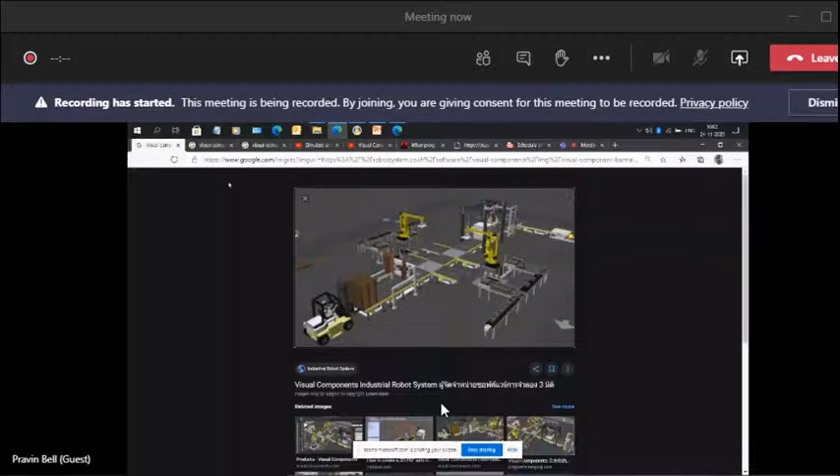Thank you, sir. Oh, can we start? Just a minute, sir.

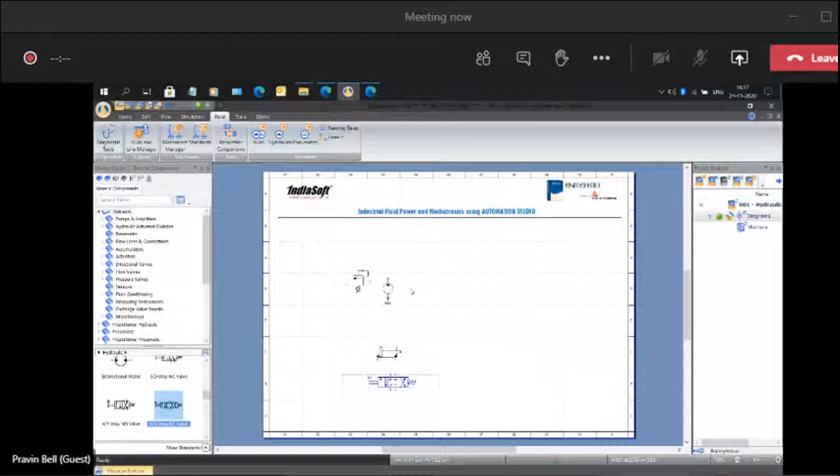So I'll be building only one basic piston extension circuit. Okay, and I'll lay out these components. I join these components. So in a matter of seconds, I build a simple piston extension circuit. Now, before we simulate the circuit, if you go to the piston and you check the piston properties, we have things like, is there an external mass on the piston rod? Is it at an inclination? What are the stroke lengths, diameters, etc.?

These are there. We also have things like, you can customize this entire cylinder. Do you want to put damping springs? What are the spring stiffness ratios? Is there a brake on the cylinder? Do you have a carriage? What type of position sensor you want to put, force sensors, speed sensors. You can customize this entire cylinder from scratch.

Even in the valves, we have total control over the internal flow curves of these valves. Now, this specifically comes into use when people are trying to do research. For example, Jadavpur University, they were using certain valves from Eaton, in which they wanted to go and modify these internal flow curves of all these valves here to make it match to the industry component. So they were able to do that because of Automation Studio.

Also, if you want to change a particular spool, there are different types of spools available in Automation Studio, hundreds of spool types. Also, things like if I want to build a 4x3 valve, I get only 4x3 spools available here. So this is totally customizable, full power over the internals of the software.

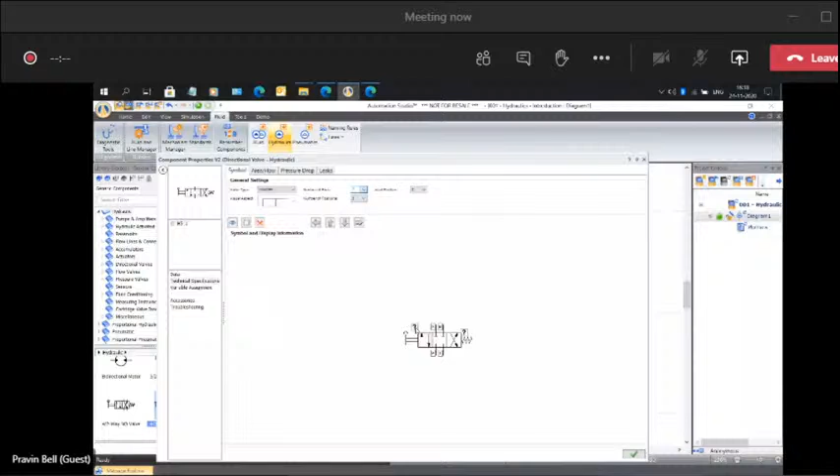Now I will simulate this particular circuit and I operate my lever. You can see simulation happening. While simulation is going on, I can change the pump displacement, cracking pressure of my pressure relief valve. You can see it is moving fast now.

Okay. Now, this is okay. The circuit is behaving, it is moving. But what is more relevant is that I need to take measurements, etc. And for that particular purpose, I have different types of measuring instruments. I have these dynamic measuring instruments where I can point at a particular component. It automatically detects what I can measure for that particular component.

This is automatically detected. I say, okay. If I say I want to measure across 2 points, it automatically says differential pressure. I simulate the circuit and I get my readings on my measuring instruments. Okay. Now these are happening very fast, so I need to take plots, which I can analyze later.

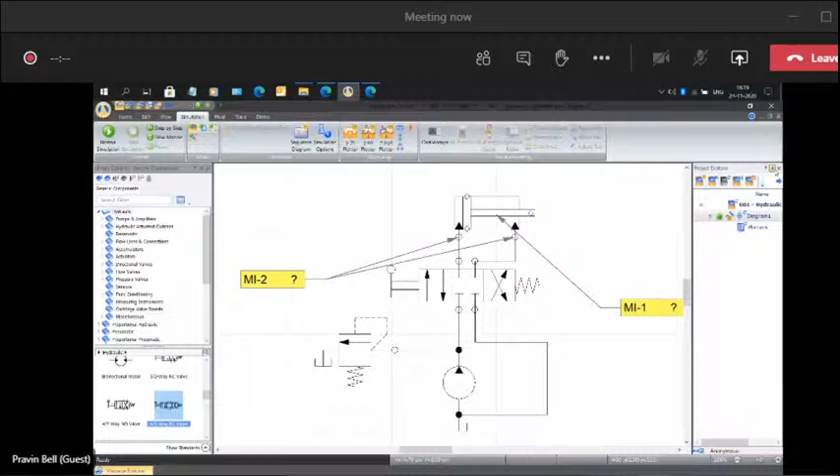Okay. And for that reason, Automation Studio now has different types of plotters. So at any given moment of time, I can open up to 4 plotters. So 2 plotters as a function of time plotters, a third plotter y as a function of x plotter, and a fourth plotter, which is a 3D plotter, y as a function of zx plotter. So the first 2 plotters are for time-based plotting.

For example, I can drag a component, put it on screen. It is going to show me the plots against the x-axis as time. So I simulate this particular circuit and I can get my piston extension here. I can plot these values here. These plotters are fully customizable. I can take measurements on them in this particular fashion, okay? Because I need to accurately see my piston extension times, etc.

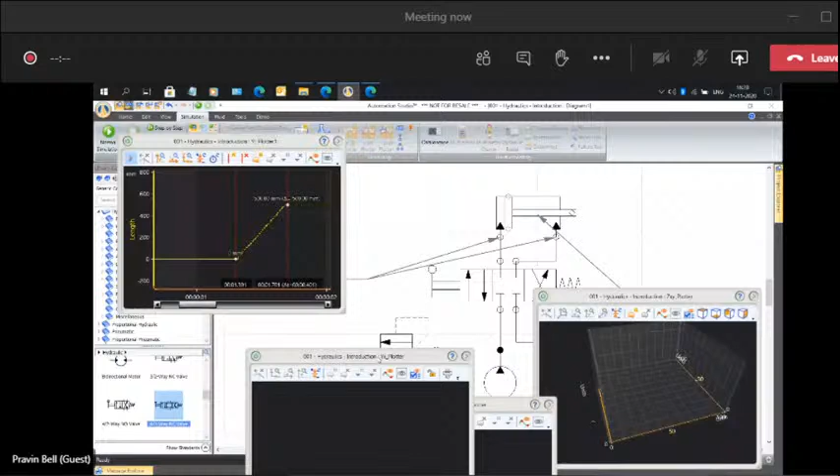So at one time, I have 2 y as a function of t plotters. If I want to plot 2 variables against each other, let's say pressure versus flow or something, I can use this plotter. And 3 variables against each other, I can use a 3D plotter. So I have very powerful plotting options available here. I can export these plots. I can say copy plot image and directly put it in Microsoft Word, PowerPoint for my dissertation or for my project report. That is possible.

Okay, so this is a basic hydraulic circuit. Also, during simulation, I have cross-section animations for these components. Okay, these are there. These are useful in teaching, no doubt. So I have these cross-section animations. Yeah. So this is a basic hydraulic circuit. Now going forward, there are more than 5,000 components in Automation Studio. So it's a very, very huge library.

Now, let's say a small example of an air distribution system. Now, this is not there in Anthony Esposito, but this is found in Majumdar Pneumatics. And air distribution systems, usually a lot of teachers over the years have called me up, how do I do an air distribution system experiment for my students? And there are solutions in Automation Studio.

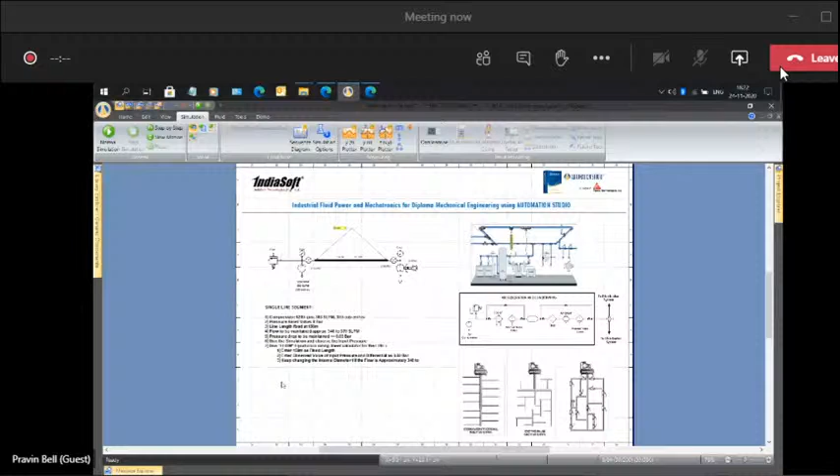Now, for example, if you go to the Majumdar textbook or even on Google, there are certain definitions for air distribution system, certain limits have been given. For example, the main line pressure drop should be maintained less than 0.03 bar. Okay. And let's say the pressure drop between the first point and the end point where the actual pneumatic instrument is working should not cross 0.1 bar.

So basically what we do is we first take the main line, 150 meters and 15 mm diameter. And if we simulate this, you can see that the pressure drop is 0.258 bar, which is very high and it is not a feasible pneumatic system. So let's say I change this to 25. I say okay. And now if I simulate my circuit, you can see it's 0.055 bar. So this is an acceptable pressure drop for a main line of a pneumatic distribution system.

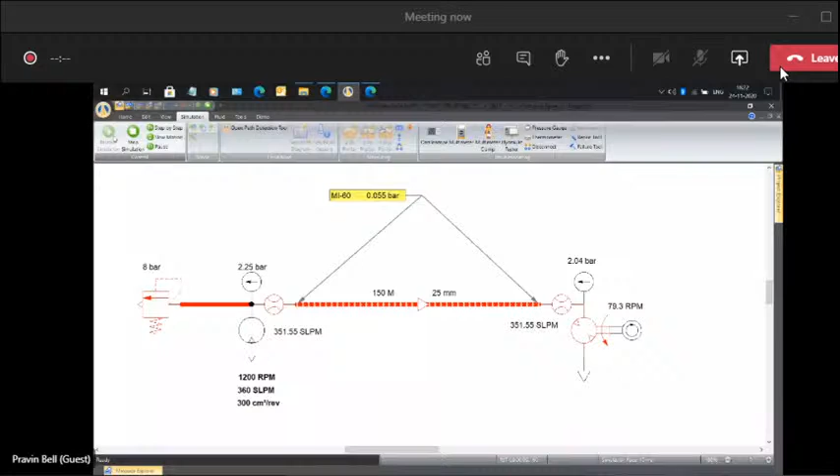Now this is a very small part, but the main problem comes when you're trying to design the rest of the pneumatic system. Because in the industry, there are different types of air distribution systems. Okay, these are the different types. There's the inline conventional network, there's an octopus type, and there's a closed loop type. So the closed loop type is supposed to be the most efficient because extra air anywhere in the loop gets diverted to the point where the maximum air requirement is.

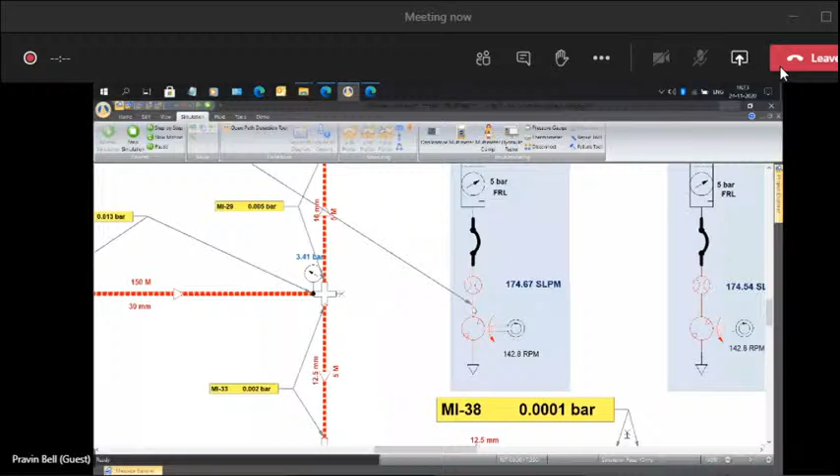So if you take a larger system like this and we simulate this, okay, you can do this in much detail. For example, if you see this, 0.097 bar is the pressure drop between the starting point here and the end pneumatic instrument here. So that is what our specification defined. Also, at this particular point, you can see air is coming from both directions. That is because the air requirement here is higher.

And because it is in a closed loop fashion, you can see the extra flow coming here. So in this way, you can play around with the diameters, the lengths, the pressure drops across maybe the tee sections of the fittings, etc. And you can go ahead and develop an entire air distribution system. So simulation software like this can be used.

Now, this itself becomes sort of a research project, or you could take up a practical student project of maybe an air distribution system which is there in a car service center of maybe Volkswagen or anything else. You can pick up projects like that and you can design these in-house.

Now coming to a very powerful part of the software, something by the name of sizing module. And sizing module is where the main designing happens. See what happens is in education I've seen that the word design is very conveniently used, because if you connect 2-3 components together and it is operating in a particular fashion, it is considered a design. But design actually means that it has to be designed to do a particular amount of work under particular conditions.

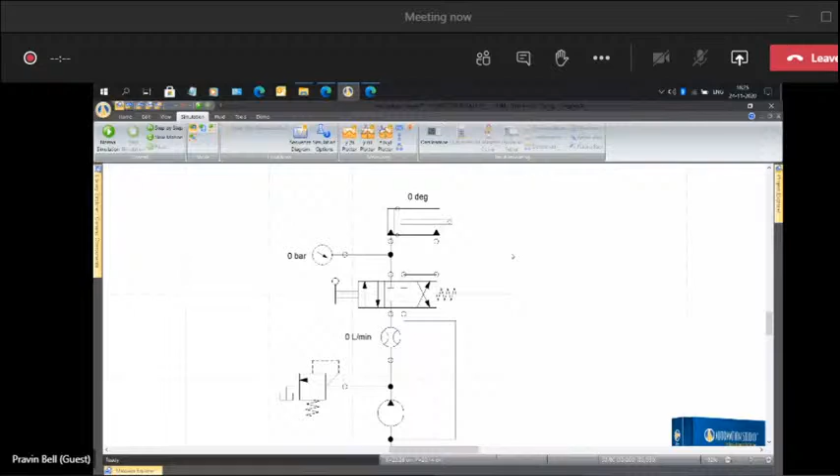So let's say we take a simple example here that this piston should extract from 0 to 100% in exactly 2.5 seconds. So how do I achieve a condition like that? Okay, so I first go to my pump, and I note down the rated flow. Rated flow here says 120 liters per minute, because this is the flow which is coming from the source, the pump, and this is going to operate my piston. So I note down this value, 120 liters per minute.

Then I go to my cylinder and open the sizing sheet module here. This is what the sizing sheet module looks like. On the left hand side, you can see there's an entire list of components here. And each of these components has got a list of equations. There are hundreds of such equations. Now, what these equations mean is that if you see at the bottom here, there's an input side and there's an output side.

So on the input side, you enter the values which are known to you. These are the known variables, and the software will automatically calculate the unknown variables. And the equations used for solving these sheets are listed here for reference, and the calculations are done here. So now I need a particular equation in which, what do I know? I know that I want a piston extraction time of 2.5 seconds. I enter that value. Piston diameter is known as 50, and piston side flow, I say 120 liters per minute.

The moment I enter these values, the software automatically calculates the stroke of my piston here. This has been automatically calculated. I say pass this value to my cylinder. I say okay. I close this sheet. I open a plotter. And now I'll simulate my circuit. I'll stop the simulation. And if I measure the piston extraction time here, you can see this is 2.5 seconds.

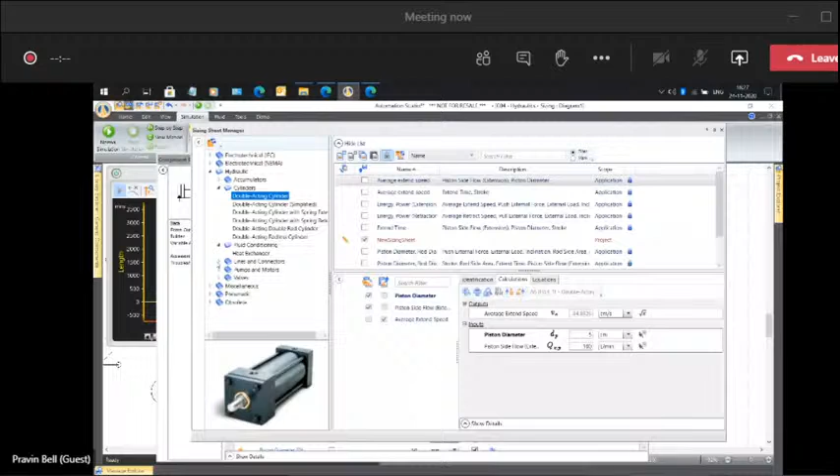So in this way, I can do a lot of these calculations here. I have to choose the equation in which I know the known variables. The software is going to use the empirical equations in the background and do the output calculations. So there are a lot of these components available here which can directly help me to do design based problems. This module is very heavily used in industry for these types of calculations. So that was the sizing module. It can be used in a lot of research also.

Another very powerful module is how do we attach forces, opposing forces and loading conditions in Automation Studio? Because at undergraduate and diploma levels, we are just looking at circuits which are operating, but we are not actually calculating what is happening when loads are applied, how it behaves, etc. So for such a case, we will take one small example: a simple circuit mounted on the front of a bulldozer, and this bulldozer is pushing sand. As the bulldozer moves, the opposing force of the sand increases over time. The sand piles up, and as the piston extracts, this is going to increase the opposing force.

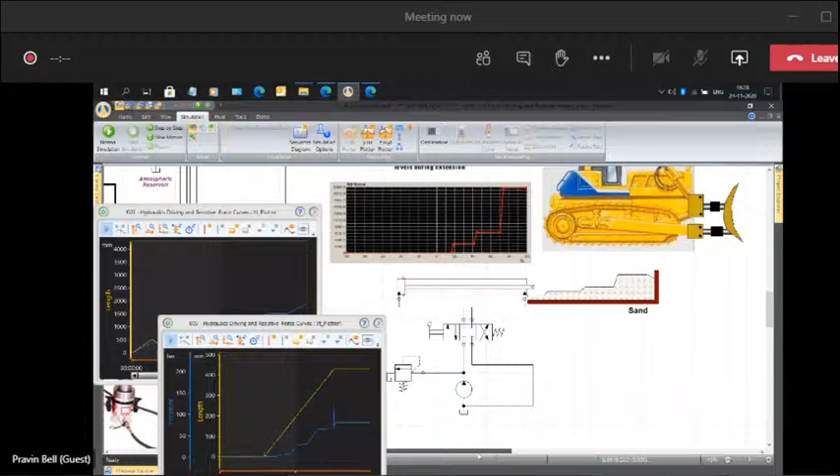So now how do I tell the software that such a condition is being applied? I go to this double acting cylinder, I go to force curves, I go to resistive force curve, and here you can see 0 to 100% on the x-axis.

So on the x-axis, this is the piston extraction, 0 to 100%, and this curve is the opposing force here. Right now it is pound force. You can choose your units, daN, Newton, etc. And this is the opposing force which is going to act on my particular cylinder.

Okay. And as an engineer, I want to go and plot the linear position of my piston and the piston side pressure which is built up inside my cylinder here. Okay. So now I'll simulate this particular circuit. And I want to show you certain interesting

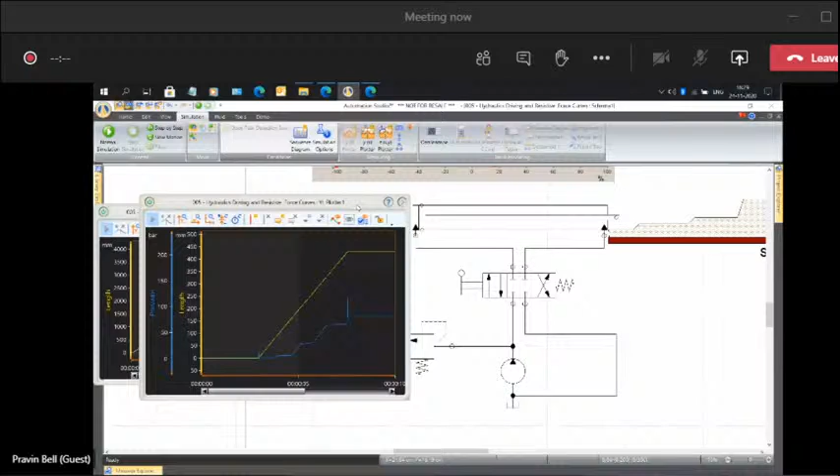observations. I've paused the circuit, and you can see that the piston has stopped at around 75 to 80%, because at that point the opposing force was so high that it could not push more than this. At the same time, you can see there's a spike in the system. You can see it in the graph here.

So now you as an engineer, how do you go around improving this circuit? You can go and change the diameter of the cylinder. You can change the system pressure of the pressure relief valve. You can put an accumulator in the circuit. There are various options you can try out. So in this case, let's say I'll go and change the cracking pressure of my pressure relief valve, and I continue the simulation, and you can see the piston now reaches the end position here.

So such type of work can be done in Automation Studio. You can do all these trials and build upon these circuits, because in the industry, this is how they actually use this particular circuit design software. So that was resistive force curve.

Now, obviously, we have an entire list of electrical components in Automation Studio: push buttons, solenoids, contactors, relays, coils, etc. And you can build electro-hydraulic, electro-pneumatic circuits. And I have seen that a lot of people, when they're doing student projects or maybe even research work, there are two types of work they do. One is at a very basic component level and a lot of mathematical calculations. And the other is the system design.

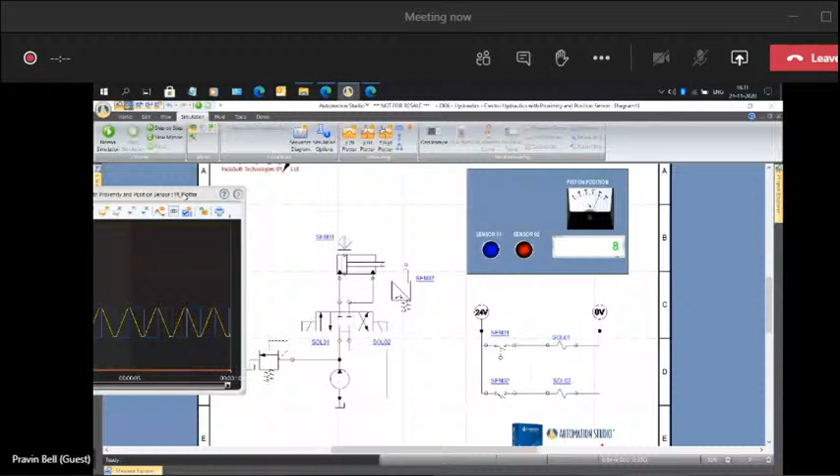So in this case, we've taken an HMI panel here. We've taken an electrical circuit here where there are two solenoids which are connected to this valve here. And there are two sensors on this cylinder here at 0 and 100%. If I simulate this particular circuit, we can see we get a self-reciprocating action here.

So since this software is a fluid power software, if I increase the displacement of my pump, it moves faster now. The circuit responds accordingly. So this is an electro-hydraulic circuit. Okay. Now going ahead, we are coming into the area of proportional hydraulics and pneumatics. So let me open up that particular area.

So now proportional hydraulics and pneumatics is where we use proportional devices. For example, steering wheels, joysticks, set point input devices, PID feedback controls, etc. And the applications for these are very huge. Almost in every field of hydraulics and pneumatics, we require proportional control. Okay, so even if you see the cabin of a Caterpillar machine, it has all these proportional devices there in the cabin itself. Okay, these are used.

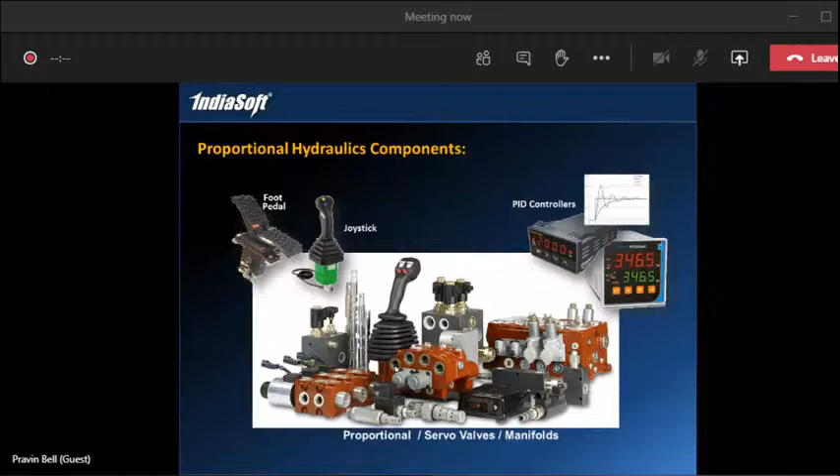So basically in the industry there are three types of valves. One is the basic valve, which is an on-off type of valve, very low cost, which we see on all trainer kits in all colleges. They're typically used. Then we have the proportional valves and the servo valves. Now these are very rarely seen in colleges. In my experience, in not more than 4 to 5 colleges have I seen proportional valve or servo valve trainer kits.

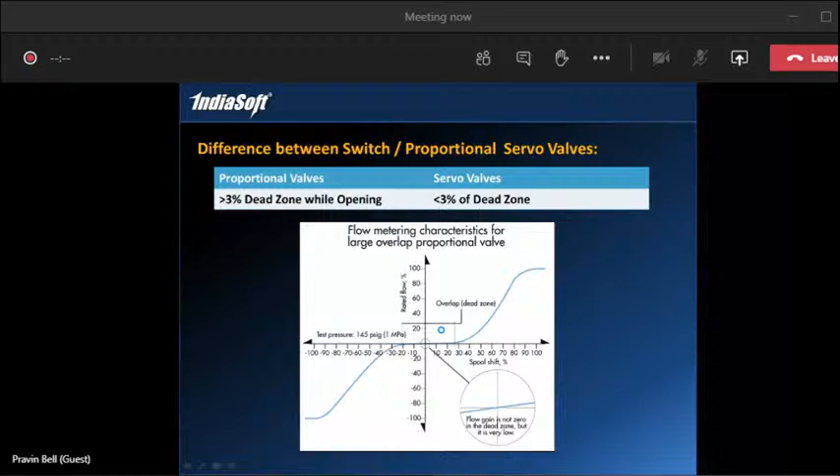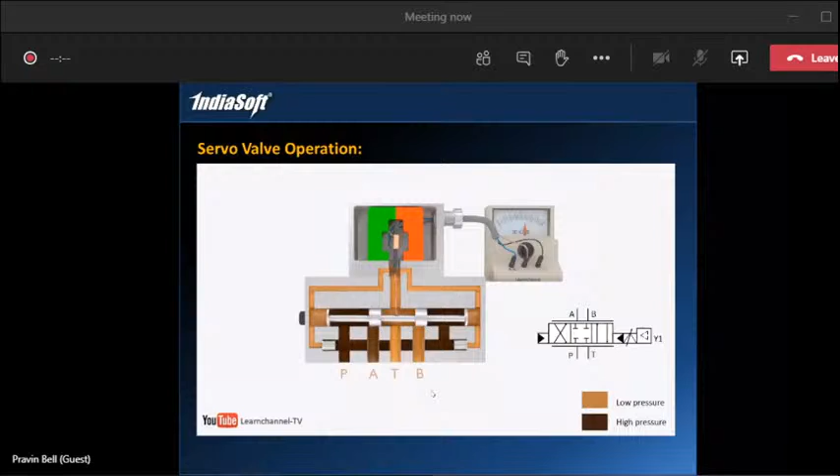And there are a lot of manufacturers of servo valves in India also, Eaton being one of them. Eaton has a very powerful valve by the name of Eaton AxisPro valve. I'll be showing you a circuit of that also. Okay. Now, having said that, this is what proportional hydraulics is supposed to be.

Yes, sir? Can I continue? Yes. Okay.

So now, having said that, we'll be shifting between a lot of applications because everything is interconnected. So now Automation Studio in the professional version has this entire list of catalogs available here. These are available in the professional version, educational also, but under annual maintenance contract. And if you see here, we have things like Parker, SMC, Eaton, Hydac, Casappa.

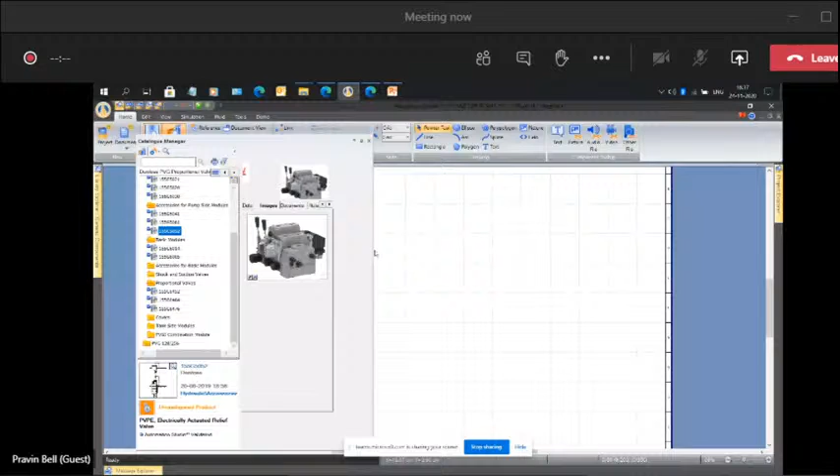There's an entire list: Danfoss, Poclain, all these are there. These are catalogs, more than 50,000 in fact. Industry catalogs are there in Automation Studio, and these can be downloaded, and if you want to see them in the software, I will show you. If you come to home, there's this catalog manager here. This menu is not usually available in the educational versions. And here there are these entire catalogs available. For example, Danfoss proportional valve group.

Now, PVG is a concept which is very widely used in almost all types of hydraulic equipment. In fact, I had a few students who did work in the Danfoss PVG valve category, and one of them even published a research paper for a hydraulic forklift machine. I'll be showing you that particular circuit. So what is a PVG concept? Okay.

So PVG is a brand name of Danfoss proportional valve group. There's an equivalent with Eaton also. Eaton calls it stack valves. Danfoss calls it proportional valve group. Now, if you see in this image, where all these levers are there, when you're building a circuit for a hydraulic tractor, or earth moving equipment, or an excavator machine, you cannot have 20 valves mounted on an iron bracket and pipes running all over the place. So we need something much more compact.

So if you see these levers here, 1, 2, 3, 4, 5, 6 levers, each of these levers is operating a particular valve which is within this casing. So this is a group of valves which has 6 valves cascaded into each other. So depending on your application, for example, this particular green machine requires three actuators to be operated, and that is why in this group of valves at the bottom, you require 3 valves.

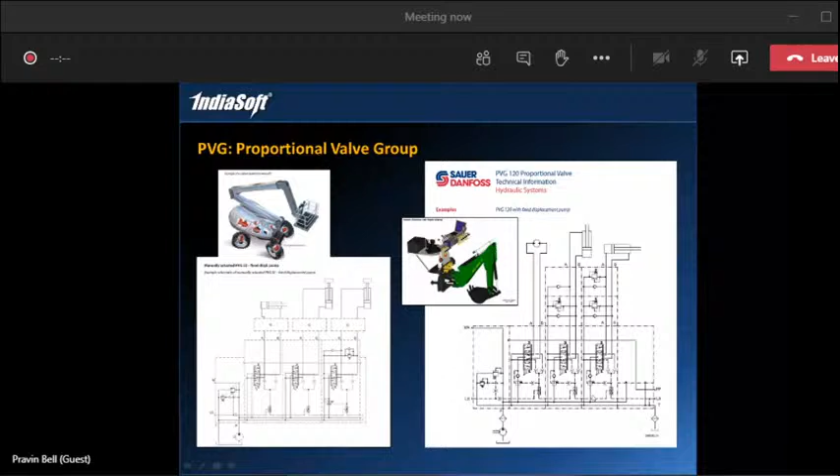Sorry to interrupt you, sir. Hello, sir. Your audio is breaking. Hello, sir. Hello, sir. You're not audible, sir. Hello, Pravin, sir. Can you hear me? Yes, sir. Can you hear me now? Yes, sir. Continue, please. Yes, sir, you are audible. I think someone muted me by mistake. I didn't do it.

Okay, I'll continue. So now in this PVG concept, there are different varieties of PVG by Danfoss. Let's say we come to the PVG 120 module here. If you see, there is this catalog part number 155G50. If I pull out a component, this is a pump side module. I pull this here, I put it here. Then there are different accessories for the pump side. These are the internal regulating devices. This plugs directly into this particular module here.

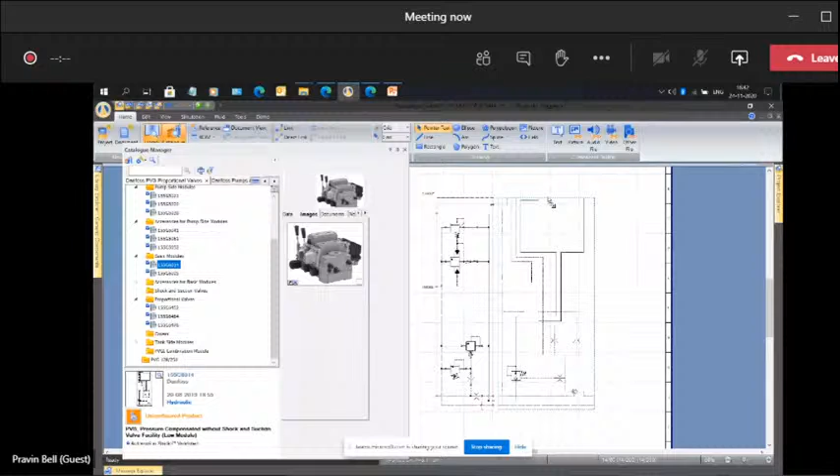Then there are these basic modules here. I pull out a manifold block, I get it here. It plugs directly into this pump side module here. There you go. Then depending on what type of operation I have, I can directly put out a proportional valve here. I'll just zoom into this. This proportional valve, I can directly plug into this system here. That is the beauty of industry catalogs, because these are ready-made components directly available from the manufacturer.

Not only that, but the internal flow curves. This is the behavior of the valve, how it behaves internally when it is operated, and the internal flow curves of the spool when the spools are opening up. Even these are fed into the software. Only at MTech and research level do people bother about these; at UG level people are really not interested. And since our FDP is about research interests of automation and robotics, this is how we go ahead by building an entire PVG block.

Okay. Now, before we simulate this, I want to take you through what is proportional control, and then we'll come back to PVG. Like I told you, we have to keep jumping between applications because they're all interrelated. So in proportional control, we have been teaching students PID, proportional integral derivative controls. And more than 80 to 90% of students do not understand the application of a PID controller and how it is to be used in industry.

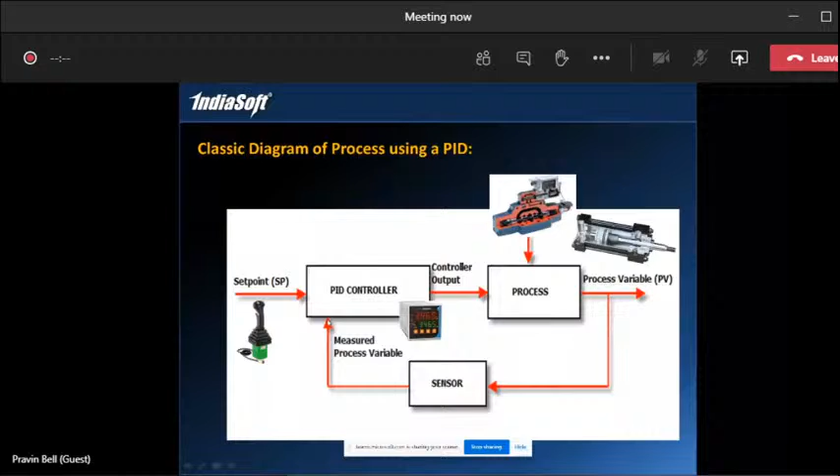Then we build this circuit, typically using MATLAB, Simulink, LabVIEW, or any multiphysics software. We build a mathematical block diagram and show them that if you change the PID values, these are the graph behaviors. And there are very strong research papers using mathematical block diagrams for hydraulic and pneumatic control, and how these PID circuits are used to control such applications.

In PID tuning, there are different methods. In the manual tuning method, you set the integral and derivative values to 0, and increase the proportional value until you get ultimate oscillations. Then you cut down the proportional value and so on, and you get a stable response. Similarly, we have the Ziegler-Nichols method, typically taught in MTech level courseware. This is what we typically do in MATLAB and Simulink: we build this block diagram on the right and conduct this experiment.

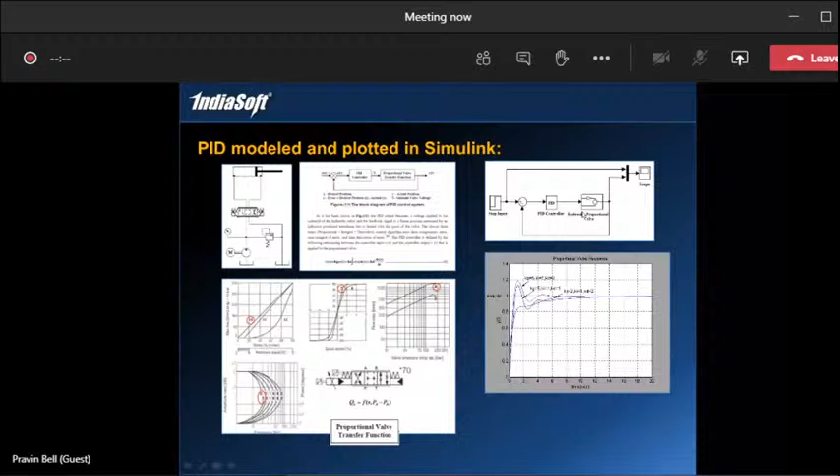So now, how do we achieve the same thing in Automation Studio? In Automation Studio, we have a PID controller. Wait, I'll open up another circuit, not this one.

Okay. Now, actually, this circuit has got 3 circuits. I'll explain. In fact, there's a research paper on PID control for hydraulic pneumatic circuits. So we'll take this first circuit on the top here.

Now, on this circuit on the top, we have a cylinder here. On this cylinder, if I go to the builder, there is a position sensor mounted on this particular cylinder. So the feedback coming from the cylinder, which is 10 to minus 10, is the left and right end position of this particular cylinder. Okay, so that is the signal coming from the position sensor.

If you see the proportional valve, we have to scale the solenoid signal also, -10 to 10. Because in the automation industry, let it be any type of a control system you're trying to build, signal scaling is very important. You cannot apply a 0 to 5 signal to an actuator which is set at -10 to 10. Behavior is going to be totally erratic. So you have to make sure all these settings are done here.

Okay, so the cylinder is sending a position signal to the control device. This is the PID controller. Then as a set point input device, we are giving a step wave like this. This is more of a combination of a triangular cum square wave, because I'm treating you as, let's say, MTech research level of simulation. There are certain things which have to be considered here.

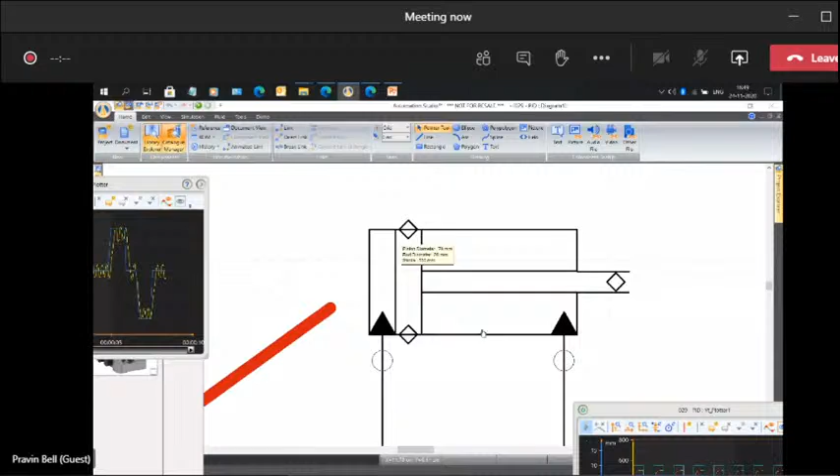The cylinder piston is moving from 0 to 100%. At both the ends of the piston movement, there is the cylinder wall. So the piston goes and hits the cylinder wall. If this piston hits the cylinder wall, it is going to get damped by the cylinder wall. It will go and get stuck there. That is the reason, if you want this piston to oscillate, we cannot let it touch the end position.

So if you see, this graph is not set to -10 to 10. We have left gaps here. At the bottom it is -9, at the top it is 8. So the piston should not reach the end position and hit the cylinder wall and get damped; we want to see oscillations when this piston achieves this position. That is the reason we set this graph from -9 to 8.

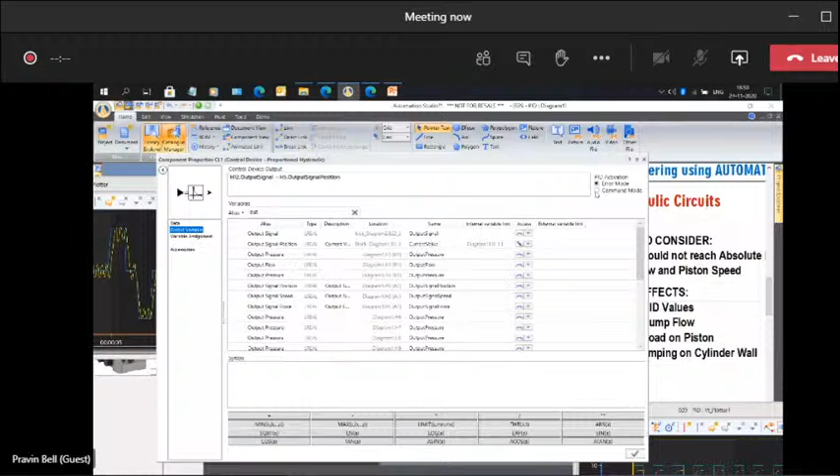Then these two signals come to the PID controller. The PID controller will do the error calculation. If you see here, we have set it in PID activation error mode, and that is going to send the signal to the proportional valve. So we simulate this circuit, and first we set the proportional value to 8, integral 0, derivative 0. And if you see the graph now, this is how it is behaving.

The blue line is the input signal from the graph, and the yellow line is the piston movement. So you can see we've got a condition of oscillations here. Next, we go to the proportional value and set it to around 3.5. We set the integral value to 1. Derivative we keep at 0. And if you see this, we have attained very fair PID tuning.

Now this is what typically even a block diagram in MATLAB and Simulink can do. But what is the difference? What is the power of a hydraulic simulation software like this? I'll prove that to you. Let's say I change the proportional gain back to 8, the integral gain to 0 and derivative gain to 0. I've got my oscillations again.

But now I go to my pump and I reduce my pump displacement. You can see half the oscillations have disappeared. So the total behavior has now changed. And this is what you cannot account for in a software like MATLAB, Simulink, LabVIEW, etc.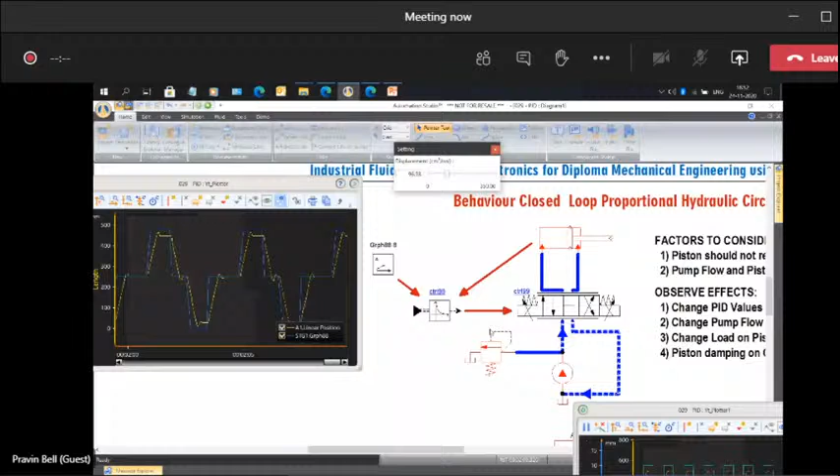Okay, so this was using a ready-made PID controller from the Automation Studio library. During the start of the demo, I also told you that Automation Studio now has a block diagram module also. So I'll just vertically tile this. Yeah, there you go.

Now the circuit at the top here was using a ready-made PID controller, which was this CTRL99. The second diagram here at the bottom is using a block diagram, which is this block diagram. Okay. Now this is a mathematical block diagram.

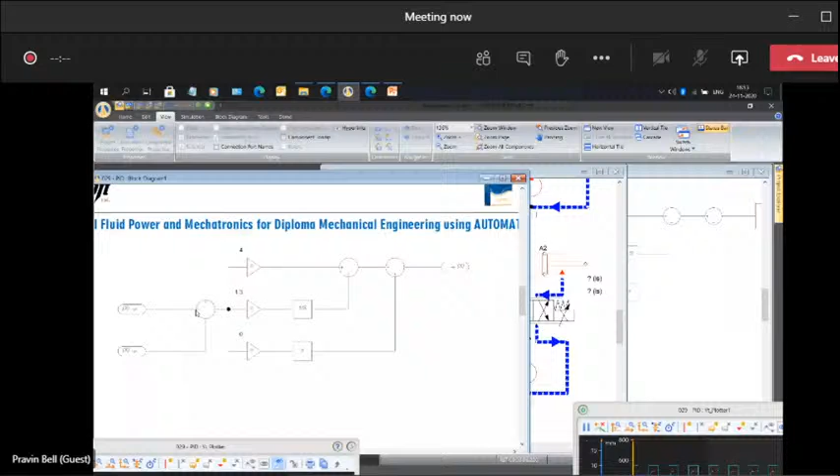So in Automation Studio, if you want this control system to be more complex, instead of just a PID, you want to use some feedback, feed forward, something in combination, or maybe you want to add another signal which is coming to this adder device here, or you want to make some changes in this control schema here, you can use the block diagram model of Automation Studio.

So we have, let me open this. We have a block diagram module here. You can see these blocks here. You have input, continuous, filter, discrete. In continuous, you have second order transfer function, first order transfer function, different types of mathematics, adder, trigonometry, logarithmic, power.

So all these block diagram modules, just the way Simulink has them, you can directly build these control systems here and link them directly to hydraulic pneumatic circuits in the software. So the Automation Studio hydraulics part will take care of all the dynamics of a hydraulic circuit. The mathematics will take care of the control side, and they will both interact with each other and behave perfectly. So this could be an area for MTech and, you could say, a research area. A lot of work can be done in this particular section here.

And at this point, I would also like to show you certain things. For example, where is that PPT gone?

Okay. At this point, I want to show you this particular list of student projects and research areas. Now, for example, there was this Miss Gauri Salunke, VIT Pune, and in third year, she did a particular project on a hydraulic forklift. Okay. I'll be showing you circuits of this later on. Right now, I'll just give a brief description.

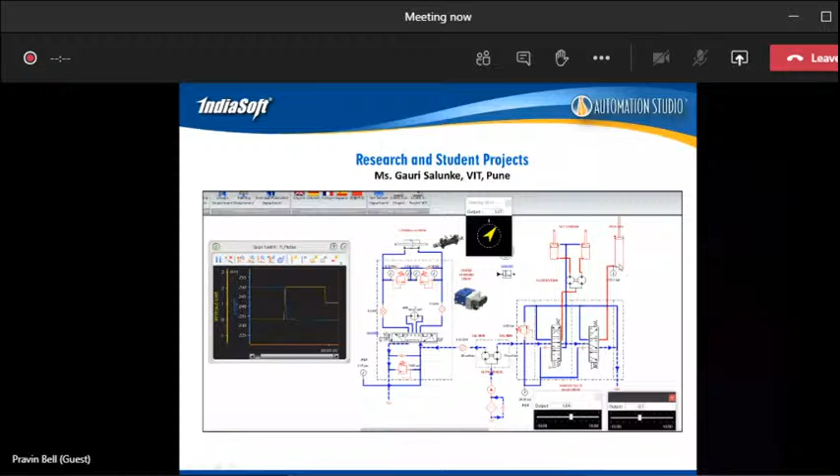Then there was another, a hydrostatic transmission system. This is a Dr. BLDA Halkatti Bijapur project. And this was an electrically controlled variable displacement pump, and obviously a PID feedback loop used in this for a symmetrical and asymmetrical cylinder. And the simulation was done in Automation Studio. So these were the screen captures from this particular research paper, hydrostatic transmission.

So there are multiple pistons mounted on this particular balancing table, and the Eaton AxisPro valve was used. Why I was shifting between catalog components and professional hydraulics is that Eaton has this particular catalog component known as the Eaton AxisPro valve, which has a PID controller built onto the valve itself. And they were using this valve in their projects for this particular control system here.

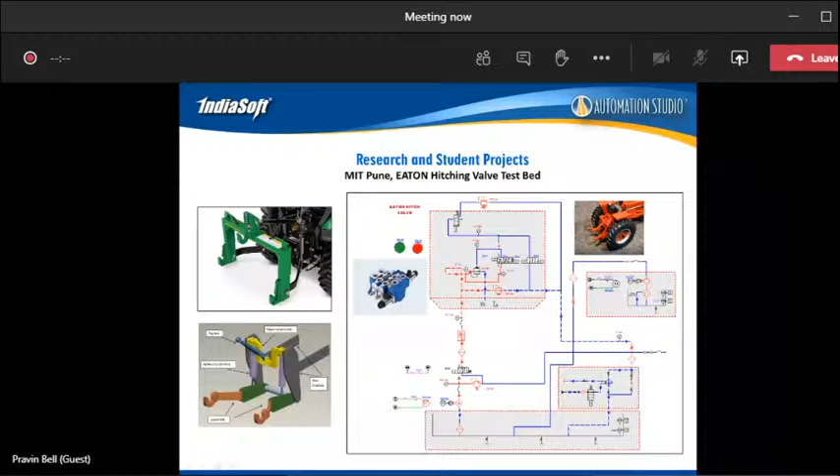This monitors the strokes of the pistons. The captured piston strokes were taken into Automation Studio PLC. Then Automation Studio has OPC communication, and that data was taken from OPC and sent to the cloud. ThingSpeak is the cloud platform which they used. They wrote a little program in Python and sent this entire data to ThingSpeak from Automation Studio. And on the ThingSpeak server, the number of cycles were captured.

And on the reverse side, they built an Android application in which this data was represented. On the Android application, they had a start and stop button, and it used to count the number of cycles. So this was one project by COEP Pune, MTech Mechatronics.

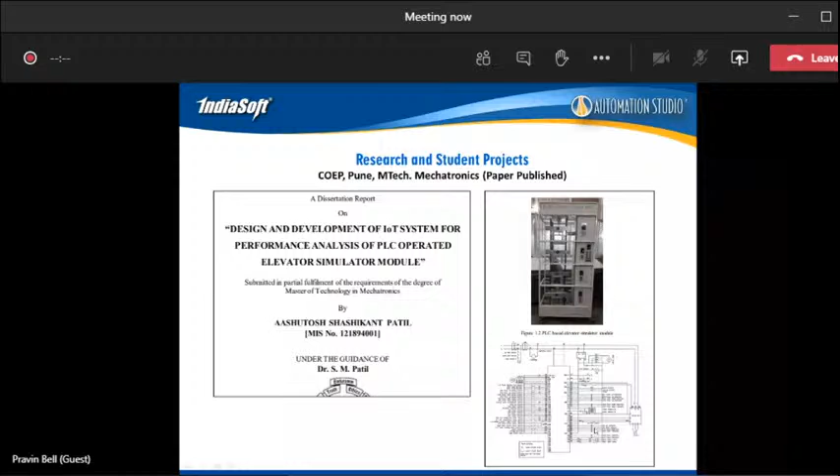Then instead of changing any electricals on this PLC, the student pulled out parallel connections from the elevator circuit so as not to disturb the original working of the elevator. And those signals were sensed. He had the aim for the experiment to capture the number of door openings and door closings. He had this aim for what data you need to capture from an IoT based system. So this paper was published.

This also used ThingSpeak and the Automation Studio interface using the OPC gateway. This was an MTech student project, and Dr. Sudhir Patil and this batch of students published this paper. It is available on Google, so you can go and find this paper. So this was one project.

So they did two versions of the same project. So this is also one project. Okay. Then if you see abroad, people are doing work like these are all research papers. If you go on Google, you can do Automation Studio research papers, and you can find a lot of areas, what type of work these people are doing.

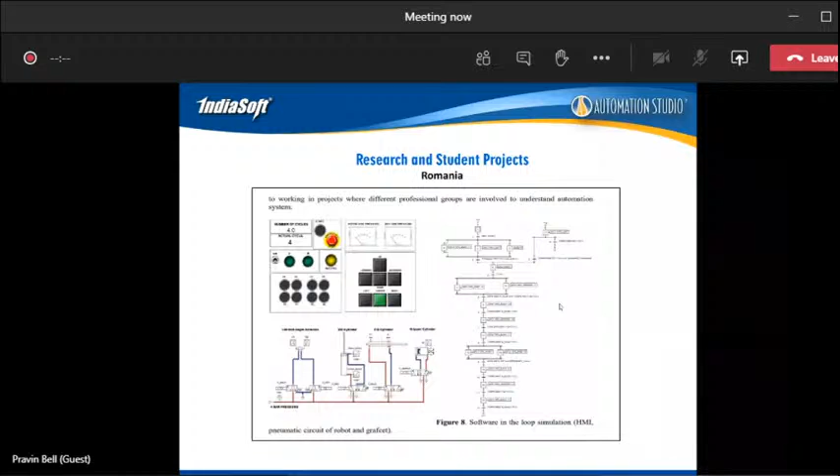Then SRM University, India, Ghaziabad, smart electrical control system using PLC and HMI using Automation Studio. This was another work. Now, excuse me. So another, just to give an example, let's say one particular area of interest. See, we are looking at opportunities for research and robotics, like in automation. So what type of research can you do?

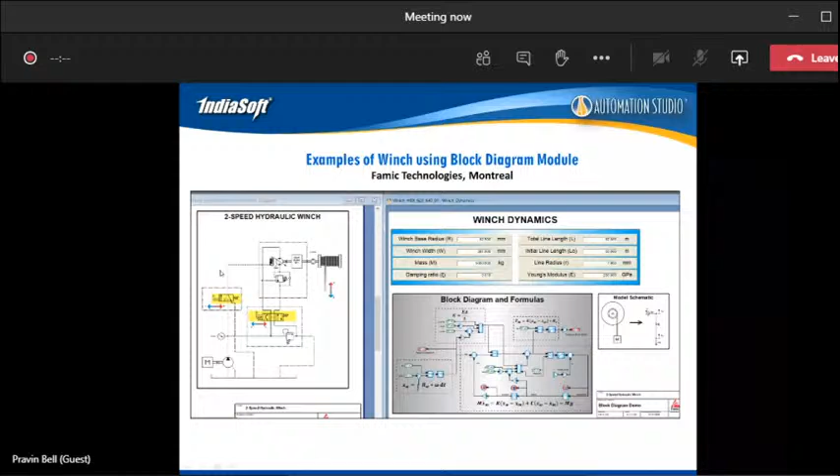And here, if you see, the winch specifications can be changed. The base radius, winch width, the mass, 5,000 kgs, damping ratio. These are defined in the mathematical block diagram, and that is acting as a load onto the hydraulic system here. So this is a research area where you can simulate the dynamics of this winch in a block diagram module or a mathematical module, and then interface it with the actual hydraulic circuit here. So this is another area. This nature of work can happen.

Also, for example, let's say hydrostatic transmission using block diagram module. Hydrostatic transmission blocks are manufactured by all companies like Eaton, Hydroforce, Danfoss, etc. So these are the hydrostatic transmissions, but the dynamics of the particular wheels, etc., those are defined in the mathematical model. So torque on the front right wheel, vehicle mass, rear wheel radius, resistance coefficient, etc. This is defined in the mathematical model, and that is directly applied to the hydrostatic transmission in the hydraulic circuit. So such type of work can be done. These are the research areas we can look at.

For example, this is the Eaton AxisPro proportional valve which I was telling you about. This is what Jadavpur University was using. So if you see, this is a valve here, and on the valve itself there's a PCB and there are PID inputs here. So externally you can directly control the PID values into the valve itself. Okay, and this can do the proportional control of the valve here.

Okay, so now let's look at... okay.

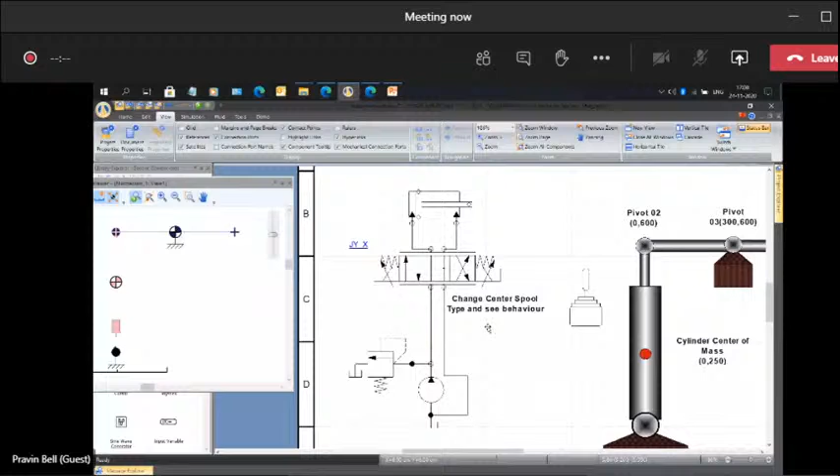A strong module which Automation Studio has, which can be used for MTech and other research areas, is the Mechanism Manager. Okay. Now, Mechanism Manager is where you can actually define real life loading conditions. For example, these are dynamic loading conditions. Here you can see there's a piston, there's a valve, and there's a joystick which operates this particular proportional valve.

But this particular piston is actually mounted on a mechanism like this. So the entire cylinder is on a pivot at the base. Then the piston rod is also connected to a pivot. It is connected to a cantilever arm, which is also on a center pivot. And on the end of the pivot arm, there's a load of minus 100 Newton acting from top. So how will such a circuit behave? That can be done by using this mechanism manager. Okay, so Automation Studio has this. There's a module to specially build these mechanisms here.

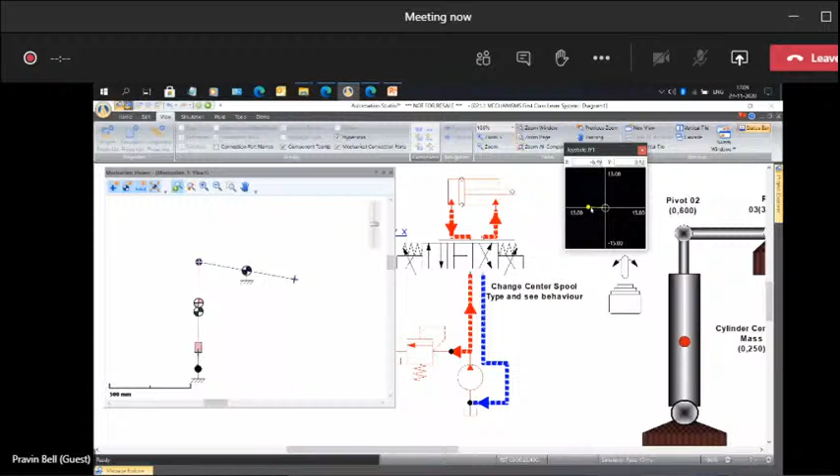So if I simulate this, you can see in the first instant itself, because of the load acting in the minus y direction, it has already pulled out the piston, and this cantilever arm is already buckled like this. So now I can use this proportional valve to go and lift this particular load like this. So these are the types of mechanisms you can create in Automation Studio. So this is a very simple mechanism. I'll show you something more interesting.

Am I clear? Is everybody following this? Yes, sir. Okay.

So now let's see another application like this. Automation Studio is very strongly used in ISM Dhanbad. ISM Dhanbad became IIT ISM Dhanbad a few years back, and they have a lot of mining equipment there, mining projects. I was there a few years ago, and I was very surprised by the different types of PhDs happening there. At one given moment of time, there were 720 people pursuing PhDs in ISM Dhanbad. I was a little shocked. And in the hydraulics pneumatics section itself, there were like 7-8 of them trying to do different types of works in hydraulics pneumatics.

Now, one of the projects was a rock breaking mechanism, in which different cylinders were mounted on a particular bracket, and the piston rods were welded together with an iron plate. This was going and breaking the rock, so it was more of a ram type of mechanism. The requirement was how do I create this mechanism in a hydraulic circuit? This is not exactly a ramming mechanism, but this demonstrates what type of mechanism I can create in Automation Studio.

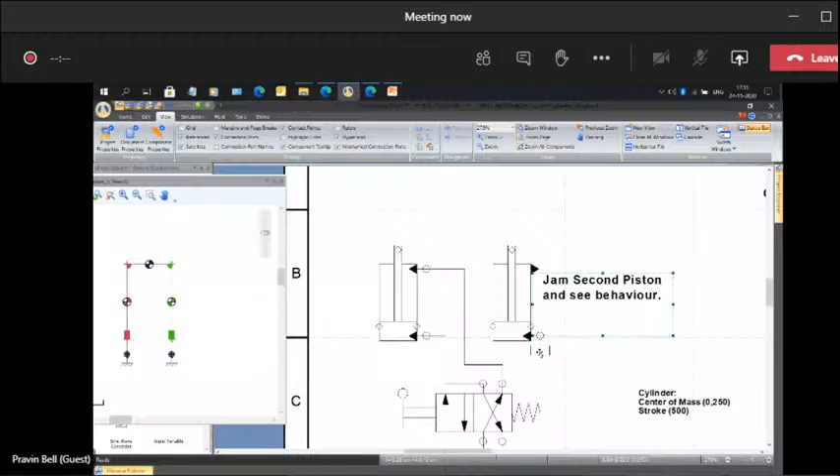So if you see in this circuit, on the left-hand side, there's one cylinder here, which is connected to a valve and a pump. And the right-hand side cylinder is just connected to a reservoir. This is a standalone cylinder. But in real life, we've taken a metal rod and we've clamped the two cylinder rods together. And that has been defined in this particular mechanism here. So now we'll simulate this

and see the behavior. If I simulate this particular circuit and I operate the piston on the left-hand side, it is going to pull out the piston on the right-hand side. So this is how they behave. This is a real life condition.

Now if I go to the second cylinder here and I go to something known as troubleshooting, and I say jam the second piston, and now if I try to simulate the circuit and operate the left-hand side cylinder, it cannot pull out the cylinder on my right-hand side. I'll simulate this again. You can see there's a jerk in the mechanism. I'll count to 3.

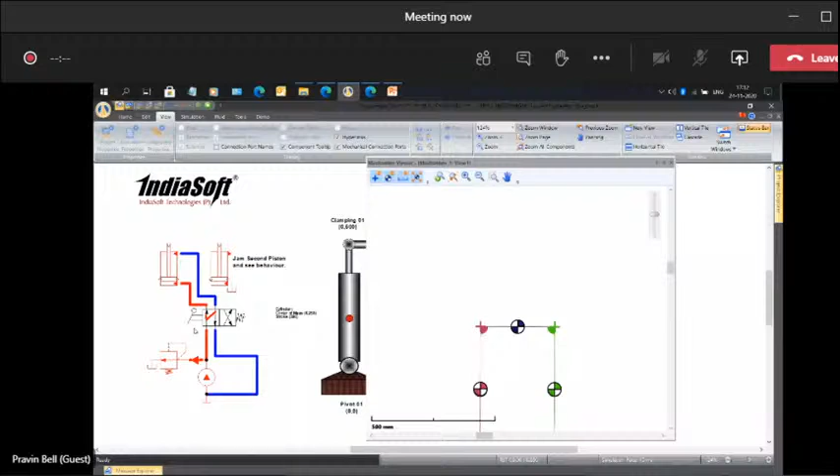Let me zoom into this. Just watch this particular horizontal bar here. 1, 2, 3. You saw that? So this simulates such types of real life mechanisms. It could be multiple linkages, it could be an entire pivot chain, carrying different loads, center of masses, etc. A lot of things can be done in this particular mechanism manager.

Now, Automation Studio also has 3D. We have our own 3D modeler, but it is not as powerful as CATIA, I-DEAS, SolidWorks, etc. But we can do Boolean-based 3D modeling. Or you can import parts from other 3D software into Automation Studio, assemble them, create the joints, and then link them to hydraulic pneumatic circuits. Initially, I'll show you a small circuit here, and then I'll show you a larger excavator circuit in which everything is used together.

So if you see this, these are two components from external 3D software. A joint has been created here, and that joint has been linked to this cylinder motion here. So if I simulate this particular circuit here, you can see the piston is operating the 3D mechanism here. So such types of things are possible. Now I'll show you a larger circuit.

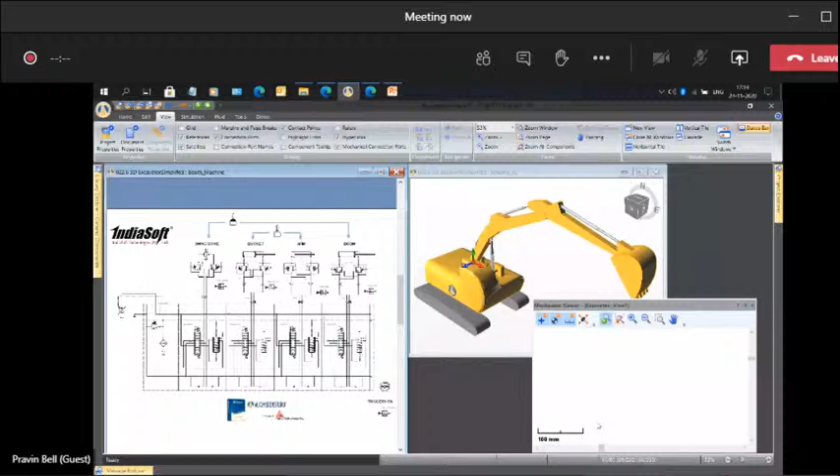Okay. Now, if you see all these things on screen right now, what have we covered? Number one, these blocks here are proportional valve groups. 1, 2. You see this? This is what the Danfoss PVG 32 valve group was. 1, 2, 3. So there is a valve group here. 1, 2, 3, 4 valves are used here. So we have used catalog components here.

Second thing, at the top here, we've used proportional control. So there's a joystick and there's a PID controller here. So in one excavator machine, we've used industry components, we used PID controllers here.

Then if you see this mechanism here, this is the mechanism of the excavator arm. So this is the body, the purple and the green is the body, and these are the pistons mounted on them, which are going to be operating the particular circuit, real life conditions. Okay, and all this is linked to the 3D diagram in the background. So multiple things which I showed you in the last half an hour are now all going to be working together here.

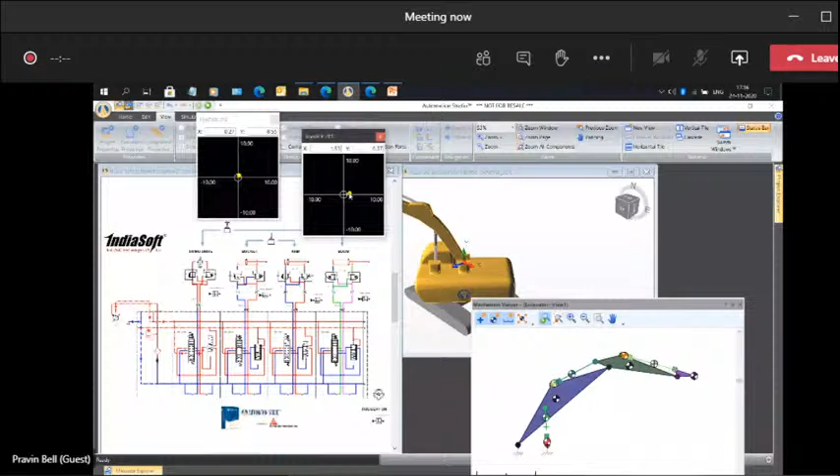So this is a bucket. Okay. This is the second joystick. There's also this steering wheel here.

Okay, so if you see, this itself has become a large area in which there are so many things you can do. You can use an industry component, build a proportional valve group, use PID controllers, use hydraulic motors, use pistons, create the mechanism for it, see how the loading conditions are behaving, and then see the entire response.

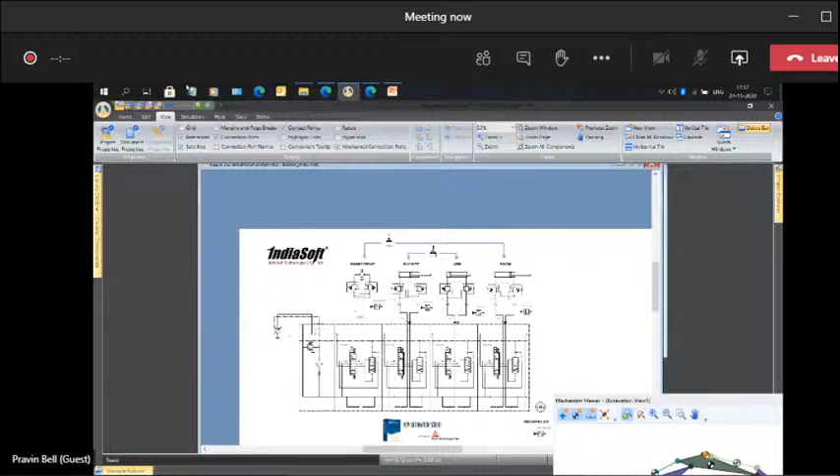So a lot of things, though this is still not the full circuit of an excavator. Excavator circuits are much more complex than this. This is just the actuation section here. Okay. So this was one circuit. Another circuit I want to show you is that of a steering mechanism.

Okay, so now this is a steering mechanism, and if you see the hydraulic section here on the right hand side, you see this entire block here, ACC76A6, the entire dotted line. This is one hydraulic steering block. So we have a servo valve here at the center. Okay, and then there is this round component here. This is known as a metering device.

So for the PID controller, this metering device gives the feedback. So depending on the flow on both sides, there's an angular movement, and this is used as feedback for the power steering. And then that is operating the valve, the pistons, which are going to be controlling the tires here. Then obviously this is the actual mechanism for the entire system. This is what the mechanism looks like. We'll simulate the circuit. We simulate this. We operate the steering wheel.

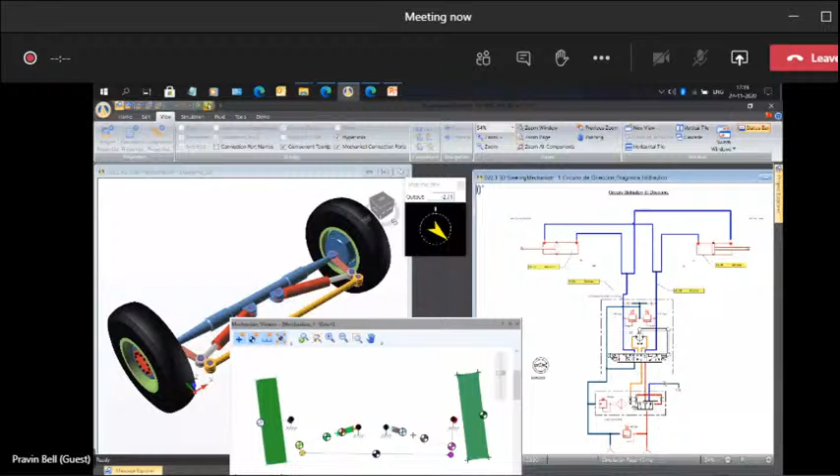So again, in this particular circuit, we have a combination of industry catalogs, proportional PID control behavior, mechanism manager for real loading conditions, and the 3D model. So there's a lot of scope depending on what you want to do, because if you see in industry, if students want to pick up projects, you want to do particular research in a particular area, you want to do it in the control section, or you want to pick up an industry component like a steering block, a manifold block,

hydrostatic steering, there are braking devices, there are lots of components available in the market. Those themselves can be used as a base for a particular project or a research area. Now, for example, Eaton has a particular steering valve. Okay. Now, Farming Technologies Canada.

Sorry to interrupt you, sir. You are not audible. Hello, sir. You are not audible. Hello, sir. You are not audible. Also, screen is not visible. Okay, now? No, sir. Can you hear me now? Here, yes. I think someone is muting me. When you're muting all, I'm getting muted by someone. Okay, can you see my screen now? No, sir. Okay, I'll stop sharing and I'll start sharing again. 1 minute. I'll share it again. Now? Yes, it is visible, sir. Can you see my screen? Yes, sir. Okay. Continue, sir.

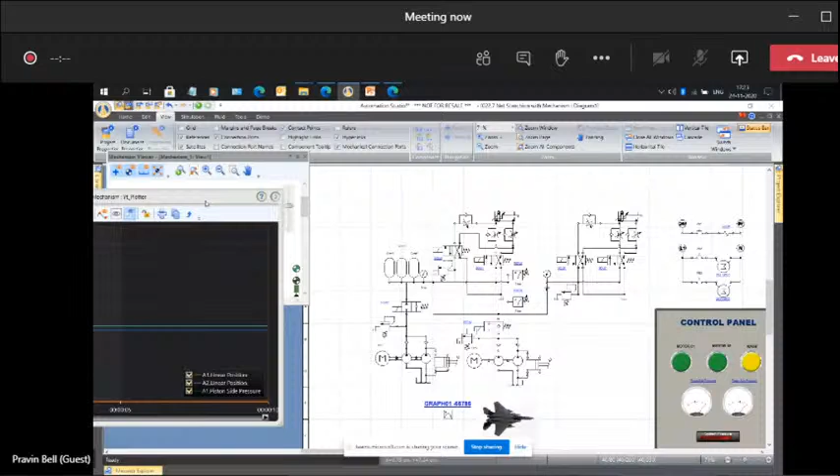This is not the complete circuit. It was not opened out to us because it's under non-disclosure. But certain main sections of this circuit, I can tell you. There are two pump assemblies here, double pump circuits. If these pumps fail, in parallel, there's a hand pump. So even if the electricity fails and these pumps do not operate, we have a backup of hand pumps here.

Okay, so these pumps are operating. Then there are 3 accumulators used here. Now these 3 accumulators hold enough charge that even if electricity goes off, 3 aircraft, one after the other, can be captured by the fluid supply given through these accumulators. Okay. Again, this system is on 24/7. So these accumulators are charged by using these pressure switches here.

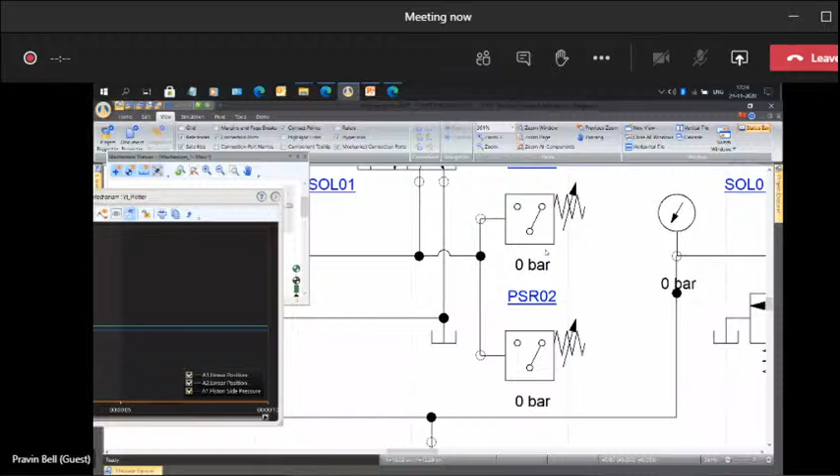So to maintain a particular pressure, these pressure switches switch on and off. So it's sort of an automated hydraulic system. Okay, and then we have the actual pistons here, and these pistons are going to be lifting the net. And here you can see this is the typical meter in, meter out configuration. So there are settings on that particular hydraulic system that this net should come from 0 to top in a particular amount of milliseconds. So those are certain design conditions.

The other design condition was also this, that between these 2 pistons, these cantilever arms which are attached to the pistons, there's a net, and this net has a self load of 900 kgs. Okay, so when the pistons are at 0 degrees, the net has 0 weight. But as the net is lifted up, the loading of the net itself is a sort of a curved loading pattern. Okay, so that loading pattern is there. That has to come into the design system.

Then after these nets come up, the aircraft has to ram into the particular net and capture the entire load. So there were a lot of small design considerations in this entire system. So this entire thing becomes a sort of a research cum project area. And to simulate the net action, this mechanism manager was used here. So these are the 2 pistons here on which the net was actually connected. So we'll simulate this particular circuit.

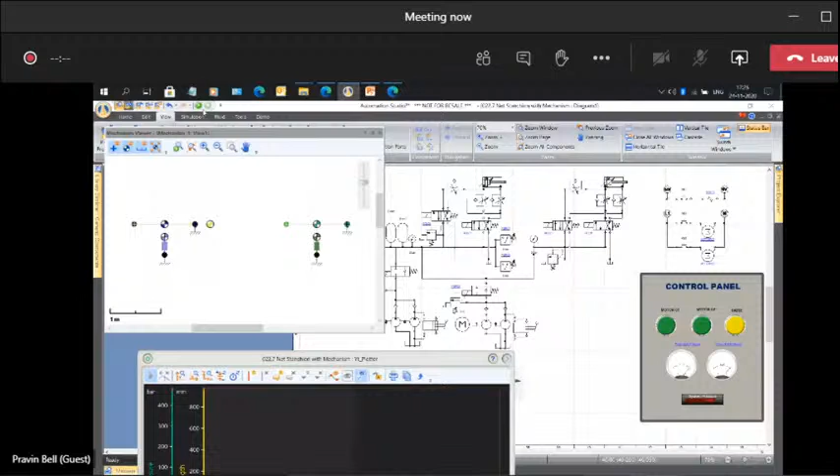We'll switch on the first motor. We'll switch on the second motor. You can see the accumulators are charging here. Pressure switches are working here. Okay. Now after this is done, I'm going to raise the net now. Okay. So I'm going to raise the net. The net has been raised. I'm going to pause the simulation.

So if you see here, this particular graph, this curve which you see here where my mouse is, this is the load of the net from 0 to 90 degrees. That is, as the net is rising up, from 0 kgs to 900 kgs. So the software even captures conditions like that. So that is very comfortably handled. So simulation is continuing here.

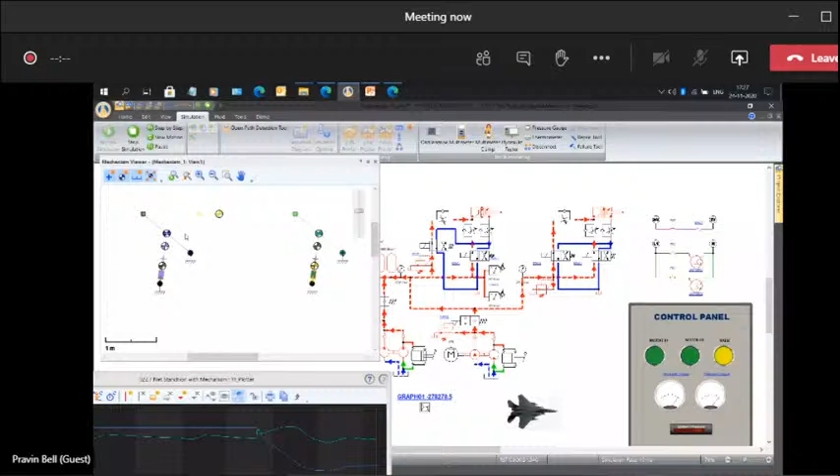Now to ram the aircraft into the particular net, we have created a graph signal here, which has got a heavy spike in it. So I'm going to trigger the graph. And you can watch the mechanism when the aircraft rams into the net. So if you see, it buckled slightly, but again it went back. That means it was able to capture that 60-ton force at the speed at which it was coming. So it was able to handle the entire load of the aircraft.

So such type of design systems, and here in the graph also, if you see, this is where the aircraft rammed into the particular net. So such type of analysis, design, research, projects can be done in Automation Studio. There's a lot of scope here. So this was one real life project. Then coming to certain student projects, I want to show you those also.

Okay, one was the paper which was published by this girl who was doing internship with me, VIT College Pune. I'll show you her circuit. Now see, this girl had come for internship in the holidays of second year. She was a little intelligent, I must say. Before the semester of hydraulics pneumatics started, she came here. She learned a lot of hydraulics. She learned the software and built this entire circuit on her own. And since we were so impressed, we created a paper out of it, and it got accepted.

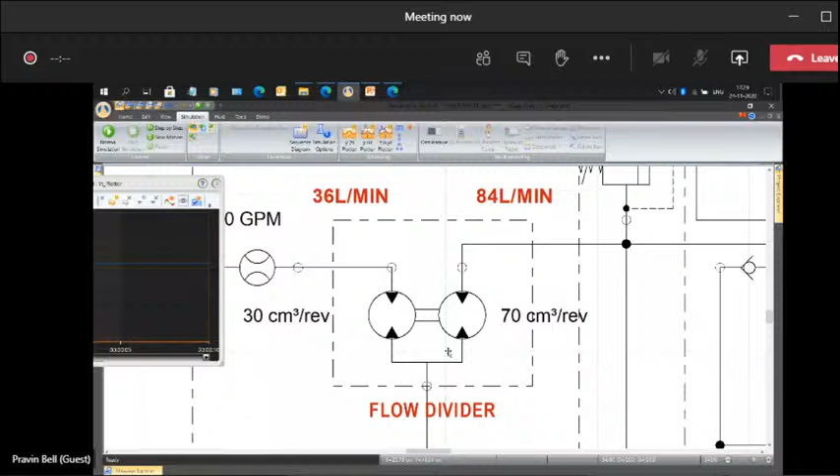And this flow divider had to divert 30% of the fluid to the left hand side and 70% of the fluid to the right hand side for the lifting mechanism. So on the left hand side, there is an Eaton steering block here. If you see this, she did not take this directly from the catalog. This was assembled component by component in Automation Studio. So there's an entire study on the Eaton steering block here.

So this steering block was used with a servo motor, metering device here. These are the pressure relief valves here, and the steering cylinder, double rod cylinder. And there was a design consideration that for the rotation of the steering wheel here, this was going through a PID controller. There was a design condition of loading and the accuracy of this power steering also here. So this was a power steering section here.

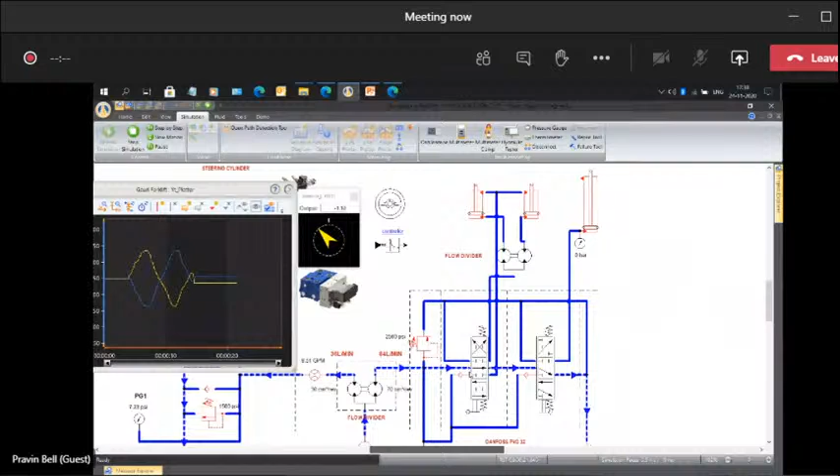Okay, and this was the power steering response here of the PID controller. This was the left hand side. On the right hand side, this particular section, if you see here, is a Danfoss PVG32 valve group, which I was talking about. So this is a PVG32. So there was a separate study on this because this is a load regulating, flow regulating type of a valve group. So this was modeled. 70% of the fluid came here.

Then there was a tilt cylinder here. Now tilt cylinder again requires piston synchronization. So another flow divider was used here, so that for erratic loading conditions, I hope these are here. Yeah, see. So these are the erratic load conditions of 4,000 kgs. So one cylinder, we are subjecting it to an opposing force like this. The second one is again a different type of a curve. So whichever load hits any of the cylinders before the other, synchronization should not get lost between these two cylinders.

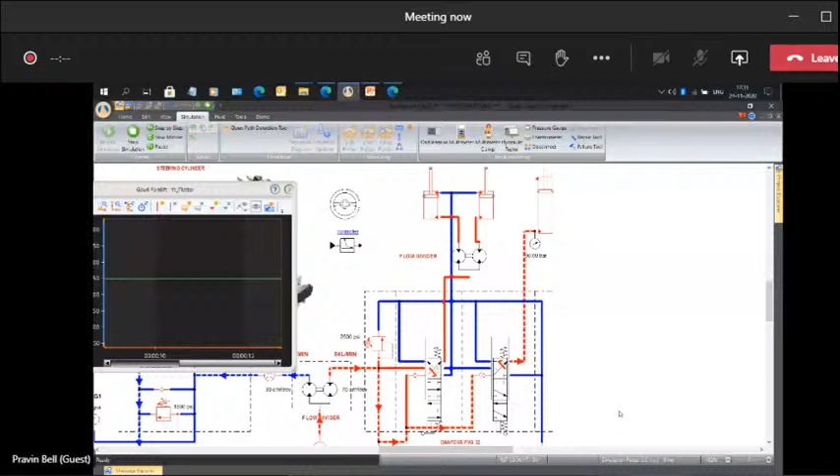That was the condition. So we simulate this particular circuit, and even though those opposing forces were erratic, these two cylinders were still perfectly in tune with each other. And then the lifting mechanism, which was a static load, to operate in I think 4 or 7 seconds or something, 4,000 kgs. So this entire circuit was designed by this particular student, and this became a paper. So this was one circuit.

Then there was another one, aircraft I showed you. Okay, Amravati College of Engineering.

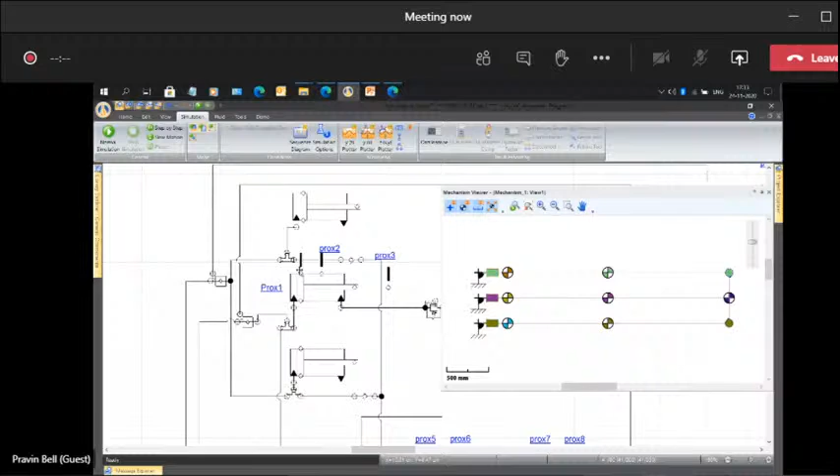So you see that there are three pistons, and there is one metal plate which is fused to the entire three piston rods here. Also, these three pistons went up to 50% for 3 strokes, like it is pressing the cotton, and the last stroke it goes all the way. So there were different types of design conditions involved in this particular circuit here. That's what made it interesting.

I think after this it will go full stroke. Yeah. So this is more of an automation type of a project in which various conditions were required here. That was one.

There are more to show, but I think we are now 5:35.

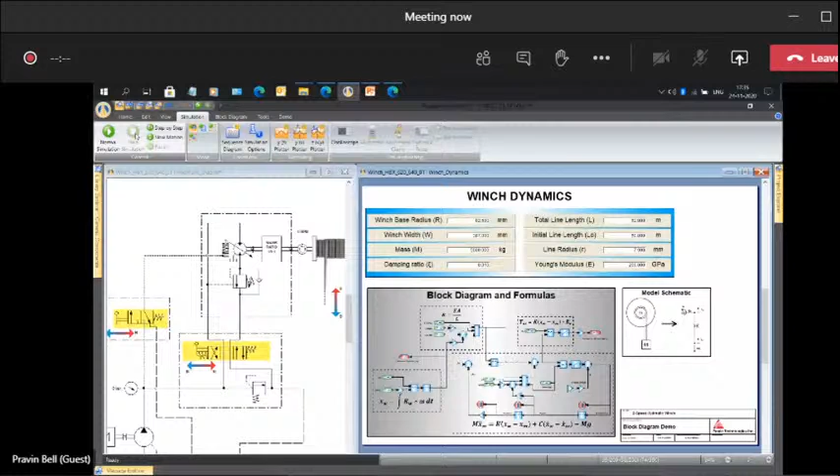Okay. So this itself could be a project or a research paper if you pick up some nice case study and want to do something in this particular area. So this is a block diagram interacting with a hydraulic pneumatic circuit. Automation Studio also has MATLAB Simulink co-simulation if you buy the API module, but you don't need that because we ourselves have a block diagram module within the software itself. So this was hydraulic pneumatics, PLCs, mechanism managers, etc.

I want to take you into another area now, which is very important for automation and IIoT communication between hardware, software, etc. And that is OPC, because OPC is now the backbone for a lot of data communication. So this was one of the lectures I had given in COEP, I think around 1.5, 2 years ago. So I've just retuned the PPTs here. OPC is a standard of data exchange.

It is platform independent today. Okay. And I'll just show you the important areas. Okay. Now in OPC, OPC stands for Open Platform Communication, and there are two versions of OPC. One is OPC UA, which is on the right hand side, and on the left hand side, what you call the classic OPC, which is known as DA, DCOM, that type of OPC.

So what is the difference between the two? The classic old type of OPC required an OPC server here, which was Windows based, and all the clients were also Windows based. So if you want to communicate, let's say, LabVIEW signals directly to Automation Studio and control a particular valve, then you required a Windows based network with an OPC server residing on the network somewhere. So everything was passing through a Windows operating system.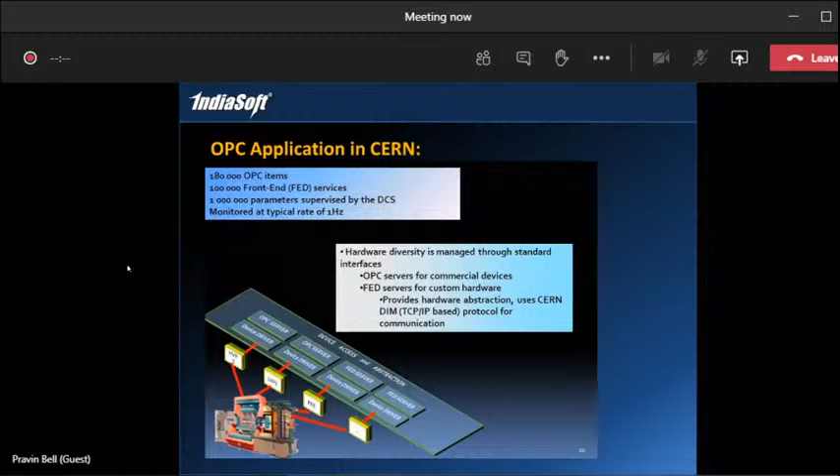And so there are around 14 stations and 200 data points which are monitoring the temperature in this entire 24-kilometer length. And the top is a company, TOP. The OPC server is monitoring this entire cooling system. So OPC in CERN, we'll not get into too many details, but there are 180,000 OPC items, 1 lakh front-end services, and around 10 lakh parameters supervised by the DCS system, so this is an OPC based monitoring system. Okay, so even those people are using OPC as the backbone.

Now coming to IoT, IIoT, and Industry 4. How does OPC play a role here? Initially, IoT was there. It started with smart devices, Internet of Things. So we had things like smart plugs, baby monitors, cookers, watches. You could start an air conditioner at home from a watch remotely, etc. So this is where IoT started.

Then it migrated to IIoT. That is, how can I use this for industry? And we came up with Industrial Internet of Things. And in Industrial Internet of Things, you have your manufacturing floor where there is a lot of sensor data. You have to capture a lot of data and then send it to the cloud. Industry 4 stands for the analysis of all this data which is captured and using it for things like preventive maintenance or auto-tune, some sort of batching, etc.

Now, I have seen this confusion in a lot of colleges, professors, that anything they want, they say, I want Industry 4, I want IIoT.

But the definition and the problem statement of IIoT is very important. What are you going to do with IIoT? The definition and the conclusion is very important. For example, if you have a CNC manufacturing shop floor, and on that CNC control panel, which could be Fanuc, Siemens, Sinumerik, whatever, you're capturing data, let's say of the amount of hours this particular machine is operating. That data is captured, let's say time of rotation. I mean, how many hours that machine is operated.

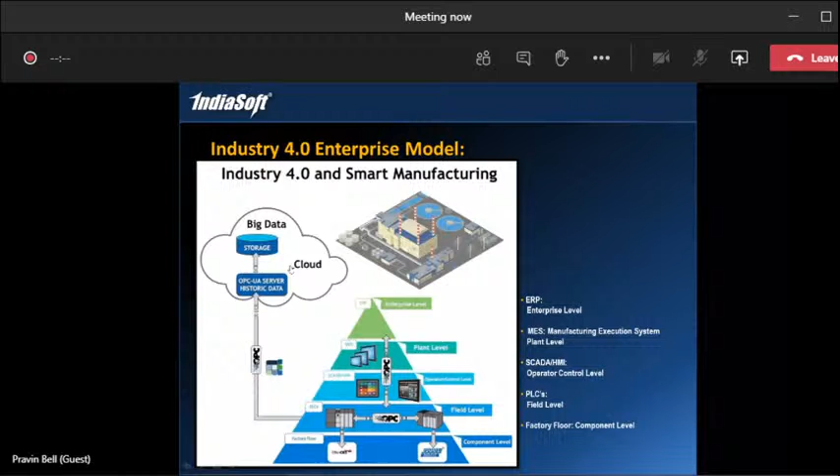Okay. So if you see on a manufacturing floor, I have this factory level. There are PLCs, SCADA, HMI, all this is on the factory level here. And the entire backbone is an OPC gateway which goes to the cloud. This data is captured in the cloud, and then this data is represented, pushed onto maybe iPads or mobile phones, etc., and sent to different people. Certain decisions can be taken. That data can be analyzed. Certain type of simulation can be done on that data, and certain steps can be taken. So the IoT, the entire loop is important as to what are you planning to do.

Now, for example, Varroc Engineering, they have shifted to Industry 4 with IoT and OPC. That is one company, and Datonis was the company which gave the cloud solution. Altizon brought Datonis. So a lot of data from the manufacturing floor was given to the cloud, and from there all the decisions were taken, batching, how much products have been produced, what is the cycle times, and what is the preventive maintenance, etc. A lot of decisions were taken after that data was captured.

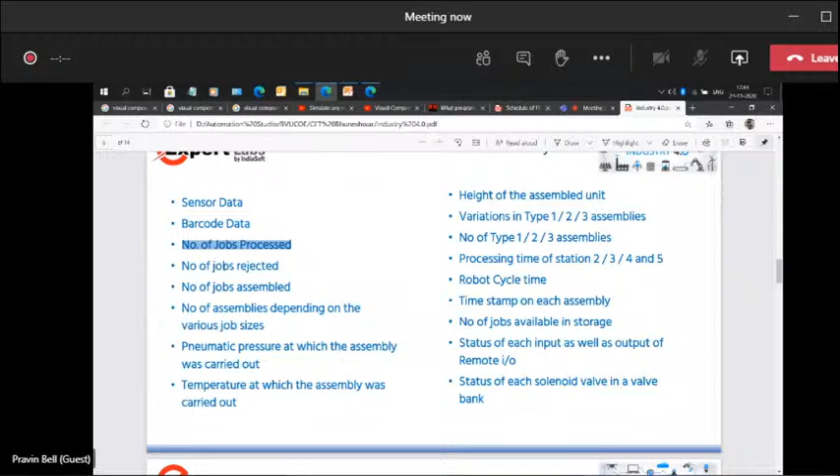Okay, so now, for example, like I told you in IoT, what you want to do is very important. What data points do we collect in Industry 4 to make it a successful IoT experiment? There is sensor data, there is barcode data, there's number of jobs processed, number of jobs rejected, number of jobs assembled, number of assemblies depending on sizes, pneumatic pressure is detected, temperatures are detected, height of certain units can be measured, variations in assemblies, processing time of stations, robo cycle times, number of jobs available in storage.

So if these are captured and some valid experiment is created out of this, then we call it a real IoT implementation. So yes, at Indiasoft also, we have these modular production systems in which we have created an entire IoT platform with real experiments here. So this is required. So why I've explained this was the importance of OPC. So now let's see OPC working. Okay, I've got some circuits for OPC.

So for OPC, we first require an OPC server. Okay, so I'm using OPC DA, the old version of OPC. This is what an OPC server looks like. This is a simulation server. So on this OPC server, I create these tags. If you see this, I've created the data tags, analog, analog, analog, boolean, boolean. These are the data tags I have used in the background. Now these are going to be used as data exchange. So this is going to behave as a data exchange server.

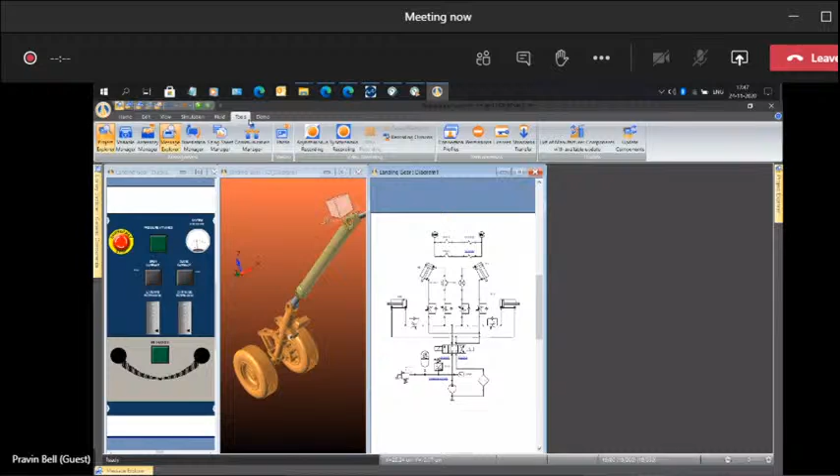Okay, so this is a circuit in which there's an HMI panel here of the cockpit of an aircraft. There's a 3D landing gear here, and this is the hydraulic section of the landing gear. In Automation Studio, if you see in the communication manager, there is OPC DA and there's OPC UA. Both are available here. So Matrikon OPC simulation server, which I had triggered in the background, is appearing here. You can see this. Okay.

Then there are groups and there are links. So these signals from Automation Studio are going to Matrikon OPC server here. And WinLog on the other side is reading those signals into a different software altogether. So from Automation Studio, I'm going to be sending these signals via the OPC server to another software here. So I simulate this particular circuit.

Okay, once a particular pressure is attained, one light will come on. Okay, it has come on. Now I'll open the carriage. Wheels have come out. And look at the right hand side also. If you see this section also, this is a different software altogether.

I'll retract the carriage. You can see on WinLog, the dials and gauges, the signals are passing through here like this. Okay. So this is the way two different software of two totally different technologies, one is the HMI SCADA software, one is Automation Studio, are talking to each other through OPC. So that is how data exchange happens through an OPC server. This happens with hardware PLCs also. That is also possible. So this is how OPC works.

And today, because of the IoT relevance which has come in, a lot of gateways have come into manufacturing. A lot of people are manufacturing gateways to IoT. Now, what is a gateway? If you're looking at it from a software point of view, let's say on my machine, I have something known as Cogent DataHub. This is one example of a software which has an IoT gateway.

Okay, this is Cogent DataHub. If you see in Cogent DataHub, there is OPC UA, there is OPC DA. In OPC DA, you can see it has already recognized the Matrikon OPC server here. Okay, so this is there. And in Automation Studio, I'll open up a circuit which is connected to this gateway.

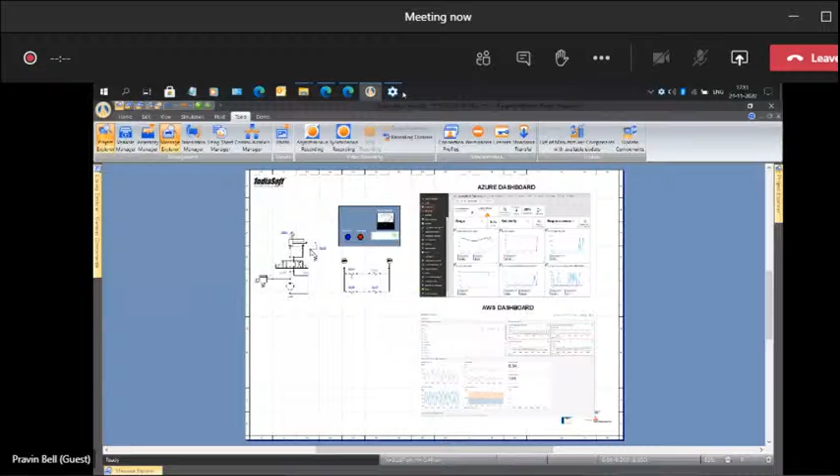Now, this gateway, if you see, has options like MQTT client, MQTT broker. MQTT client and MQTT brokers are the protocols which talk to services like Amazon Web Services or Microsoft Azure, etc. These are the clients which actually talk to the cloud platform and send data from your local machine to the cloud for IoT data capture. So OPC DA will take data from Automation Studio, and the MQTT client sends it to the cloud. So that is what these gateways do.

So a lot of gateways are now available in the market. This could again be a very strong area for MTech and research. How can you implement these gateways? There are hardware gateways also available in the market. And in this, I want to plot trends of certain signals coming from Automation Studio. So this is Automation Studio. It's a simple circuit. There are two sensors which are getting triggered, so these two signals are going to the gateway.

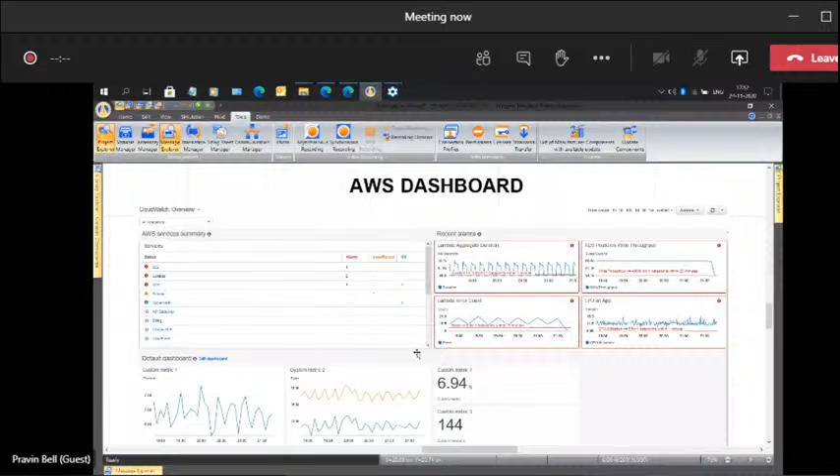Right now I'm not connected to Amazon or Azure, but the cloud services will have typical dashboards like this. And the gateways will send data to these dashboards. So you have to set a channel, you have to set the parameter values, you have to do all the settings for the variables, and that data is read into these dashboards. So this circuit I'll simulate.

And in Cogent DataHub, you can see this data is getting captured here. So the same data can now be sent to the cloud via the MQTT or REST protocols which are available. So this could be another area for a lot of MTech and research. You could create these gateways. You can experiment with Amazon Web Services, Azure, etc. Not only this, even software like, let's say, Kepware.

Okay, this is Kepware. Kepware is a software which has multiple drivers for another 100, 200 types of PLCs, etc. Kepware also has OPC support. You see this? These are the signals from Automation Studio, and this has an entire section for IoT gateway. So Kepware can also send data to the cloud, to Amazon Web Services or Azure or any of the IoT cloud services.

So this is again another area where a lot of work can happen. Not too many people are experimenting with this. College of Engineering Pune, COEP, they've done two projects already, which I showed you in the beginning: one was the elevator and the pneumatic clip making machine. So they have been doing work in this particular area. So this is another area where a lot of work can happen in research and projects.

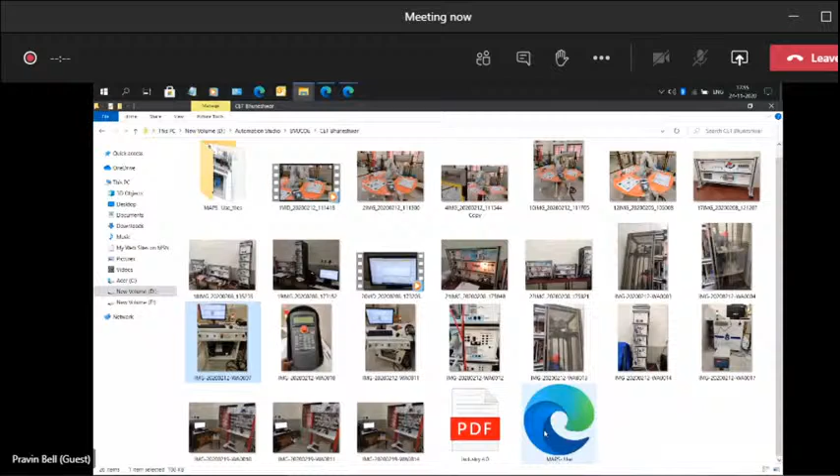Okay. Now, the reason why we promote Visual Components is it's a software which has more than 500 types of robots from different manufacturers. So you're not stuck with one particular brand. You could have ABB, Fanuc, KUKA, Mitsubishi, etc. Not only that, this software also has all the components required to build a robotic cell. Let it be a conveyor belt, an AGV machine, a circular overhead conveyor, a pneumatic dispensing machine, sensors, etc. There's a huge list of components which are available. You can see this.

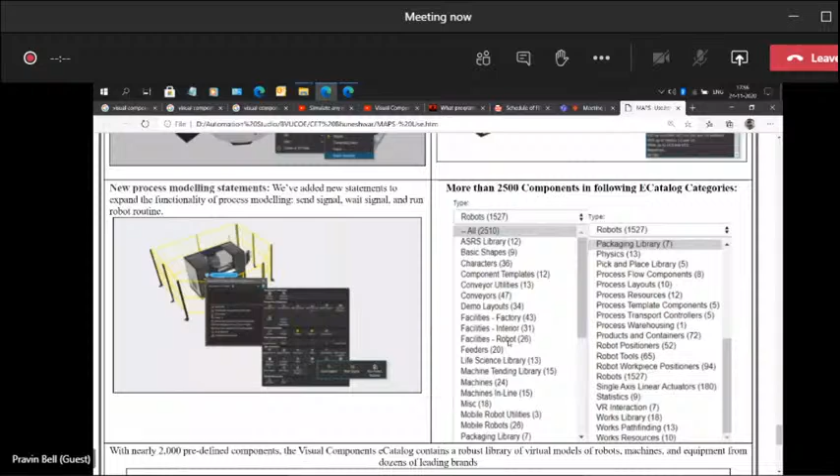So we have automatic storage retrieval systems, ASRS, conveyors, conveyor utilities, robots, machines and lines, CNC machines, etc. And not only that, the robots which are here have post processors for a lot of robots. See, in robotics, there are certain things you have to remember. A lot of people say, I want open robo language. People who are trying to do work say, I want to connect to MATLAB, I want to connect to Simulink, I want to do this. But that really doesn't achieve anything.

Because in the industry, what programming language is used for robots? Java, Python, or C#? In the industry, none of them. Actual robots in the industry have their own proprietary programming languages. KUKA uses KRL, ABB uses RAPID, Fanuc uses Karel. And if you see the syntax structure, for the same type of movement, all of them have different syntax.

Okay. So Visual Components, the software which I was talking about, has got all these models, and it has got post processors like we have for CNC machines, and you can post process the code for ABB, KUKA, Fanuc, Yaskawa, etc. It also supports Python if you want to do basic level research work. If you want to play with the inverse kinematics of the robots, Visual Components allows you to play around with the inverse kinematics in simulation mode. Yes, it allows you to do that. It supports Python also.

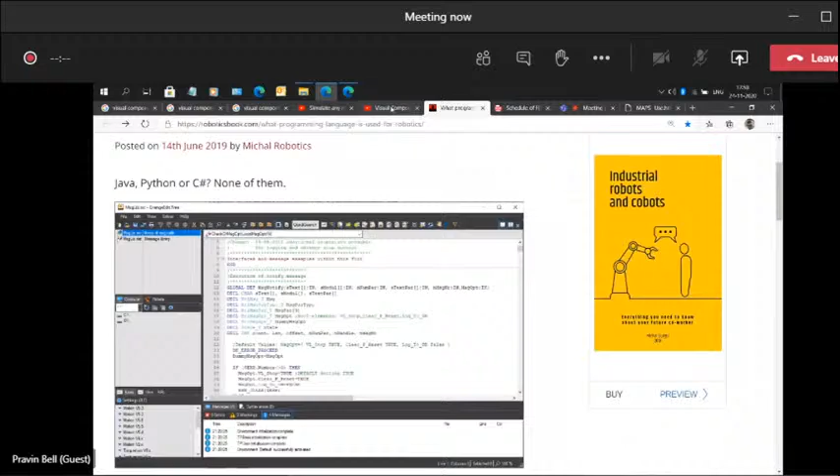And just to give you an idea of Visual Components, you can see this. It allows you to create entire factory layouts, because what you've seen is basic robotics cell with experiments, interaction of multiple robots, and manufacturing automation where you have loading, unloading of CNC machines, storage retrieval systems, FMS systems, CIM systems. So this software covers the entire length and breadth of this topic of manufacturing automation and robotics.

So it does the process as well as CIM, FMS, and basic robotics also. You can import 3D CAD geometry. You can even build your own customized robots inside the software.